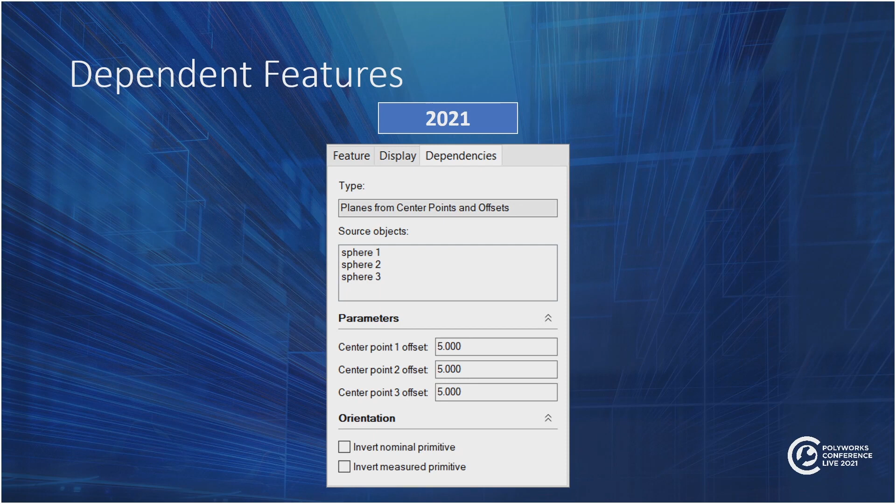Now, in 2020, it is not possible to view or edit numerical parameters for dependent features. Users have to recreate the entire chain of objects or operations when a modification must be made. What they would need to do is create new dependent features. But now in 2021, you can now edit numerical values for dependent features.

The benefits of this improvement include the visibility and traceability of numerical parameters, the flexibility of being able to edit numerical values if incorrectly entered or need modifying, and finally, it is more efficient as there is no need for the user to delete the feature and start over.

Now, the following is the list of parameters that can now be edited within 2021 following this change. So you've got offset, length, distance, radius, height, slope, step, and also tolerance.

So I'm now going to demonstrate to you some of these user experience changes I've just been showing you in the presentation. So I'm just going to come out of my presentation and open up our workspace manager. I'm just going to open up this predetermined inspector project.

So just wait for that to load for a second. Now you will see here, those of you familiar with 3D scanners and possibly our training courses may be familiar with this part. A sheet metal part here that I've created some comparison points on. Done an initial best fit alignment as it was scanned, extracted some features, and then we've performed a DRF on it. So what I'm going to do, just to show you a few of the new changes that you can do in here, the first thing I will show you is the dependent features.

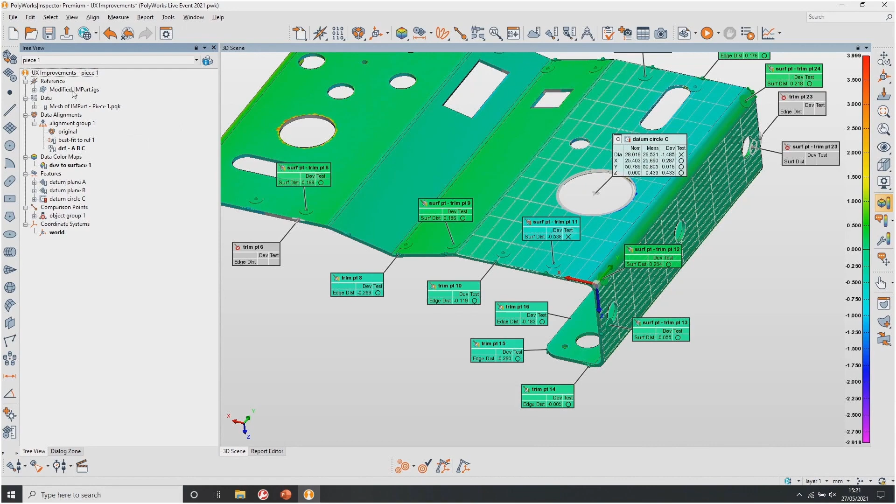So on here, if I just turn all this off, we have the CAD, and we also have datum plane A here. So to show you the changes that have been made to the dependent features, I'm going to create an offset plane to show you how you can edit the numerical values. So first of all, I'm going to go to create plane feature from my features menu. I'm then going to change my method to from objects and then hit the drop down for my sub method.

Now, as I mentioned, you will see this a few times in this demo. We have the search available here. So I can begin to type in planes and offset, and you'll see here it's there. So instead of having to search for it, it's already there. Just jump back to my tree view. So I highlight datum plane A, so it's now highlighted. Go back to my dialog zone, and what I need to do is type in an offset value in here. So I can say, for example, 20 millimeters.

If I now hit create, you will see here that we now have an offset plane, plane 3, which has been offset 20 mil from datum A. Now, as I said, in 2020, you were not able to edit the value of that offset. You would have had to delete the plane and start again. Whereas in 2021, if I right click on plane 3 and go to the properties, if I jump into the dependencies tab, you'll see that our source object is datum A, and we've also now got our offset parameter down here. So I'm now able to go in and edit this to 25, and you will see this move in a second.

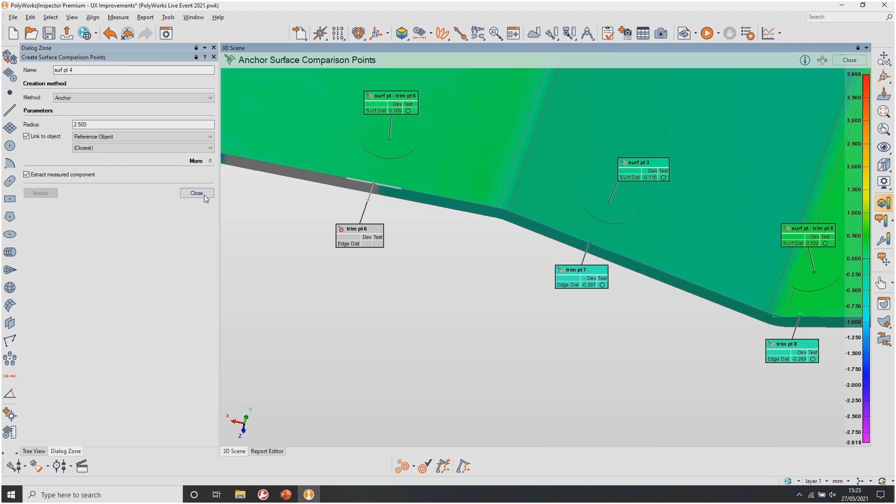Now, you may have noticed when I loaded this up, we do have some comparison points on here. So we have some trim edge points, and we've also got the back points created with those. So you will see here, if I zoom in, trim point 7 here is missing the back point. So just to demonstrate the select interactively tool to you, what I can do is go to create surface comparison point. I can then anchor a comparison point on this face here, close to trim point 7. So that has been extracted for us, which is good. So you see here surface point 3. You can rename that at any point if you want to.

And then what I'm going to do is link trim point 7 to surface point 3. So I can expand my object group, find trim point 7, go into the properties by double clicking if you prefer, jump into measurement, and then offset. You can see here that I can select relative to comparison point. So if I use the select interactively icon, I can then select surface point 3, hit apply afterwards, and that will now be linked to trim point 7. So if there's any deformity in the part, trim point will be affected by the change of surface point 3. So just a few things there to show you in the new user functionalities in 2021 Metrology Suite, so Inspector.

We now move into part 2 of this presentation, where we will look into the changes and improvements for PolyWorks AR. A note to start off this part of the presentation is the support for HoloLens within AR. In PolyWorks AR 2020, the first and second generations of the HoloLens are both supported. For those of you who are unfamiliar with the HoloLens, you will see on screen now the first generation and now the second generation. Moving forward, a decision has been made, as developing PolyWorks AR for both of these generations takes more time. Supporting the first generation prevents InnovMetric from implementing new technologies into the second generation. And finally, Microsoft no longer actually sells the first generation of HoloLens.

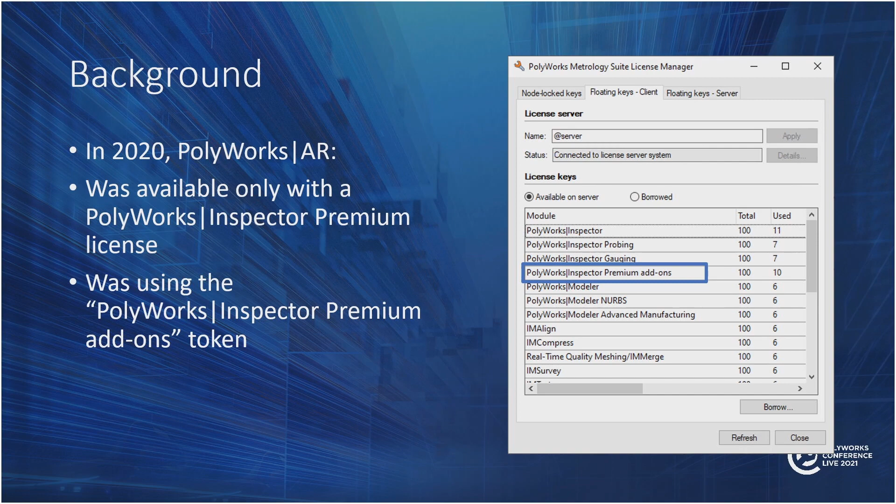A word now on the AR package and the licensing information necessary for this particular product. Now, in 2020, PolyWorks AR was only available with a PolyWorks Inspector Premium license. Within the PolyWorks Metrology Suite License Manager, it was using the PolyWorks Inspector Premium Add-ons token. But now, in 2021, there is a need to make PolyWorks AR available for both probing and gauging workflows. Consequently, PolyWorks AR now has its own token within the License Manager.

To summarise, in 2020, PolyWorks AR was only accessible if the user had an Inspector Premium license, whereas now in 2021, it is possible to use PolyWorks AR with a PolyWorks Inspector Probing and a PolyWorks Inspector Gauging license. This has been enabled to aid new added workflows that I will discuss with you all shortly. In PolyWorks AR 2021, the part localization workflow has also been modified.

In PolyWorks Inspector 2020, the user would have needed to activate the augmented reality plugin from the Workspace Manager options, and then within Inspector would need to access the Tools menu, Augmented Reality, and then launch the Model Target Generator. Once you have selected the Model Target Generator from the Tools menu, if not already, the user would have been required to install Vuforia Engine, which could only be achieved with an internet connection.

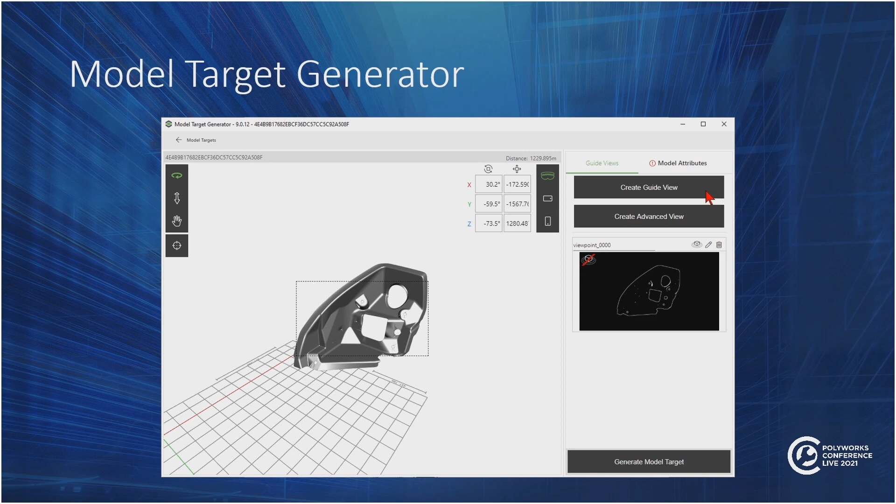Within this software, the user would have had to select the HoloLens icon to establish the in-use hardware, then access the model attributes to determine orientation and units, then create the guide view, and then only once these steps have been followed, generate the model target. The solution in 2021: Vuforia is no longer required to create the model view. This is achieved directly within PolyWorks using the HoloLens.

So now for the part localization process, the user will have to download the open PolyWorks Inspector project using the PolyWorks AR app for the HoloLens. Once downloaded, the user will have to manually locate the hologram onto the physical part and then decide whether to use their own manual positioning or choose the auto locate feature. I'm now going to show you a quick video of how this will all work.

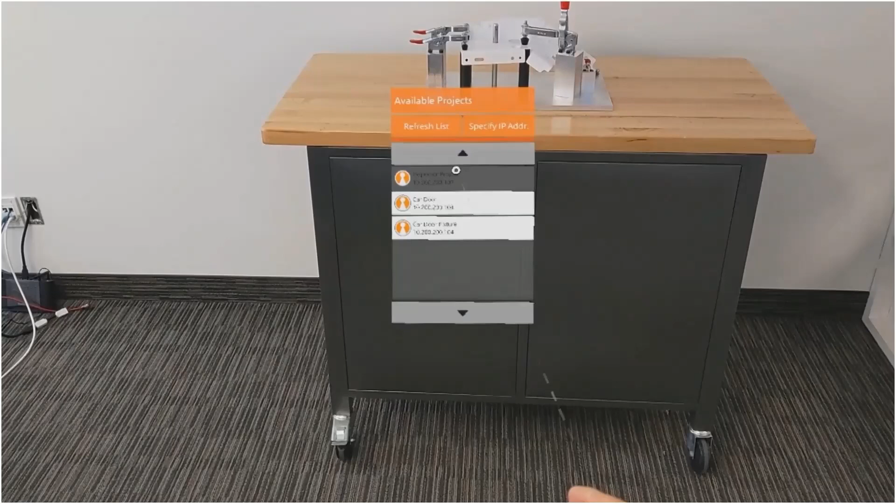So with their wrist, the user will have to tap onto it, which will open up the HoloLens, and the user will then have to select the PolyWorks AR app. You will need to have the Inspector project open at the time. So you can see here now the user is going to select the Inspector project from the app. And this will just take a few seconds to download. As you can see here, a download has been successful, so you will have to select the OK button.

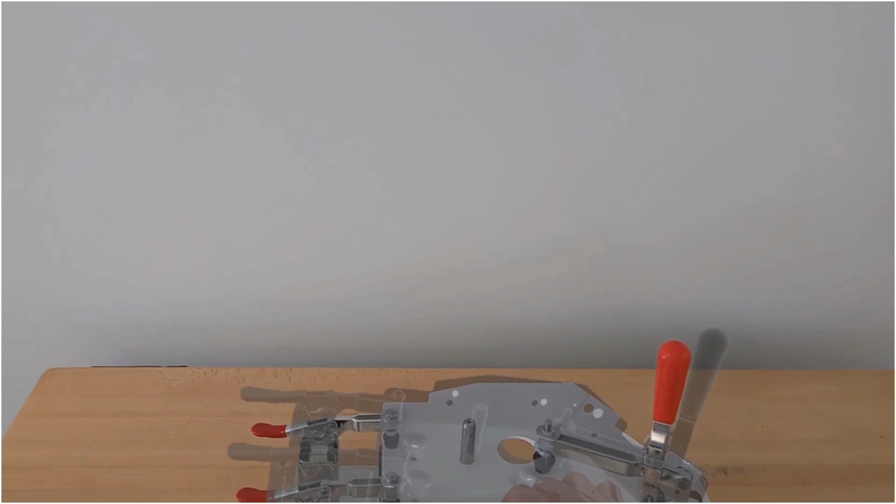So that was just showing you how to begin the part localization. So you can now see the hologram you can control with your hand by pinching. So this will allow you to rotate. So the idea of this is to manually position the hologram onto the part. So you can see here the user is doing different techniques to move the part around. So again, with the pinch of the fingers, he or she is able to rotate. You can also use rays on the model. So you can sort of step away and use the rays to also orientate it, as you can see here.

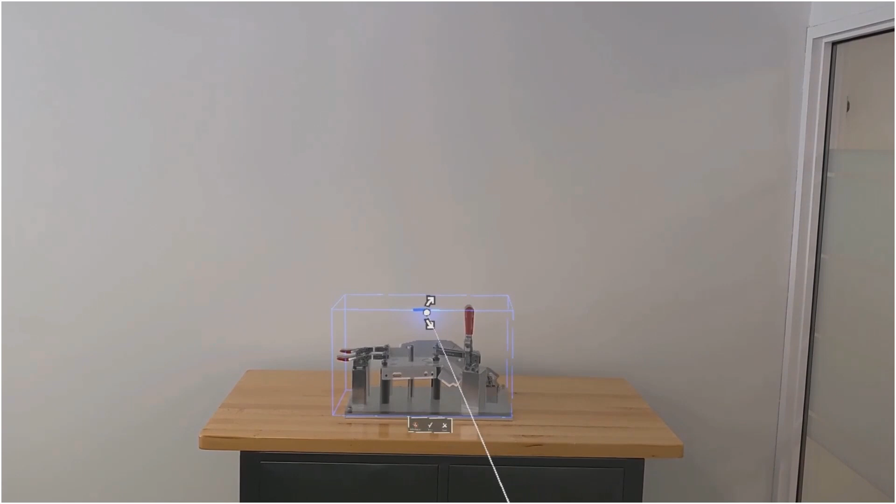Another technique for the manual orientation of the hologram are these handles that will appear on the bounding box of the hologram. So this will allow you to orientate it sort of through an axis. You do want to get this as close as possible, but it doesn't have to be perfect.

And then the last thing that you will do is, as on the previous slide, you will have a toolbar at the bottom where you can either use the auto locate, which will do it for you, or you can accept the manual location that you have created yourself. And then as you can see here, the part has been localized. So there are different techniques that you can choose. And then yeah, once you are done, you will just hit either auto locate or go.

There is no longer any installation required on the user's PC. In regards to the HoloLens, you will need the PolyWorks AR for HoloLens app, and potentially a framework package might be required for you to install the first time you use the PolyWorks AR for HoloLens app.

The interface has now changed too. You'll now see that even when the augmented reality plugin is turned on in the Workspace Manager options, the option has been removed from the Tools menu in Inspector, as the need for Vuforia engine has gone.

The date at which the support for Vuforia will end is May 2021, so we have in fact actually already gone past this date. PolyWorks part localization is supported from PolyWorks Inspector 2020 IR11 onwards.

The benefits are that there is no need to install any additional software. There is also no need for an internet connection, previously required to install Vuforia. There is a much smoother transition between PolyWorks Inspector and PolyWorks AR, as there is no need for any project preparation in regards to Inspector.

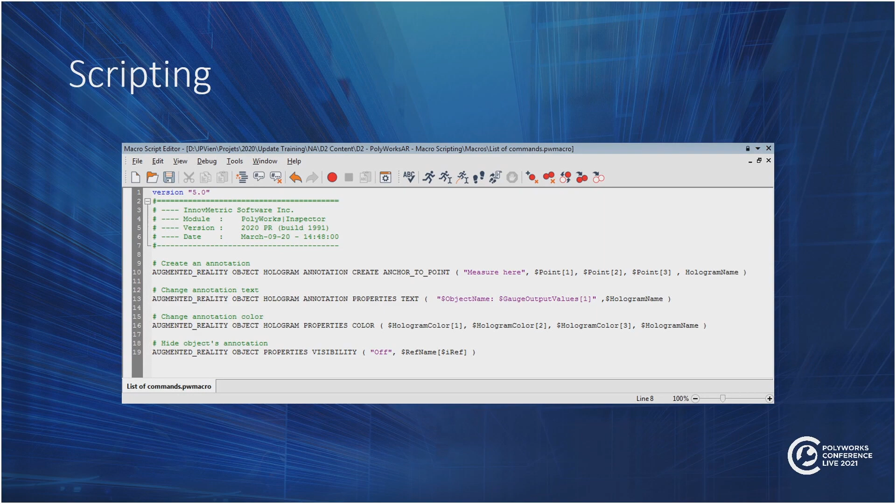To unlock as much workflow as possible, macro commands were developed, including creating an annotation, changing the annotation's text, changing the annotation's color, and also hiding an object's annotation.

Now, due to a high quantity of user requests for specific new functionalities, there are two brand new supported workflows for PolyWorks AR 2021. We now have a gauging workflow, and we now also have a build inspect workflow. I will be showing you both of those shortly. So let's start with the gauging workflow.

Previously, to be able to measure using a gauge device in PolyWorks, PolyWorks would obtain the measurement using a macro script. This is no longer the case because of the new gauging plugin. The solution is that PolyWorks AR 2021 now guides the user to the correct location.

The HoloLens will then automatically take a picture once a measurement is acquired. The user can then access the captured image in the object menu, where they can then either view the image, export it, or delete it. So this is a pre-recorded video from InnovMetric, just demonstrating this process. So it begins augmented measurement with digital gauges.

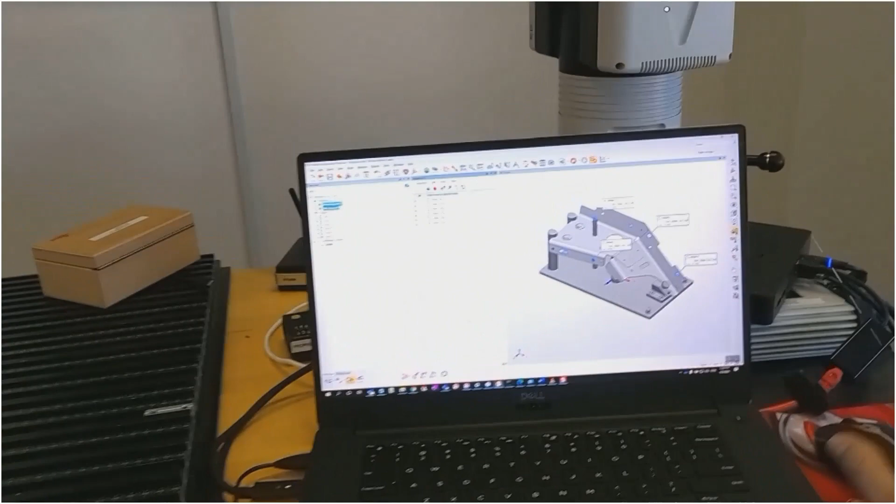Okay, the goal is to measure this part with digital gauges. So I have a project already open. I have some objects set to the gauge method, and I created a measurement sequence. So if I run that sequence, you see that I have some guiding instructions telling me to measure the width of slot 1 using gauges. And you can see that if I would be far away, I would have guiding arrows that would point me in the right direction.

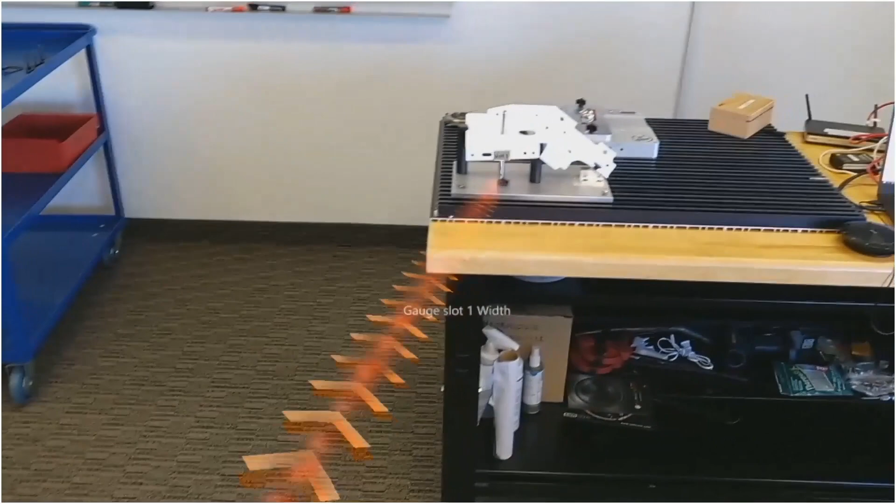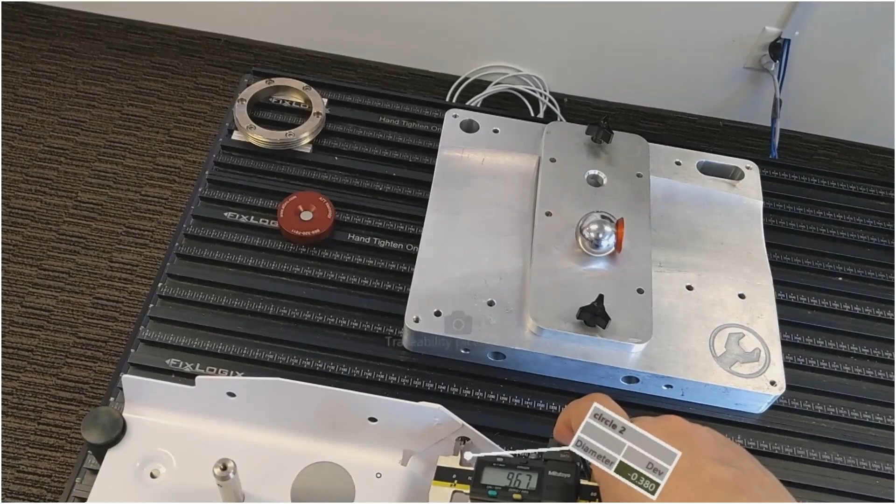I can now go and measure this characteristic, and I want to stay there for a few seconds because it's going to actually take a picture of where the operator was during that measurement. He then follows the instructions to the next object. You always see the previous result and the next object to measure.

I'm done. I can see all my results. I can just move annotations out if I need to. And that's it. I was able to do a guided inspection, but with the added benefit of traceability. For any of those objects, if I wanted to review,

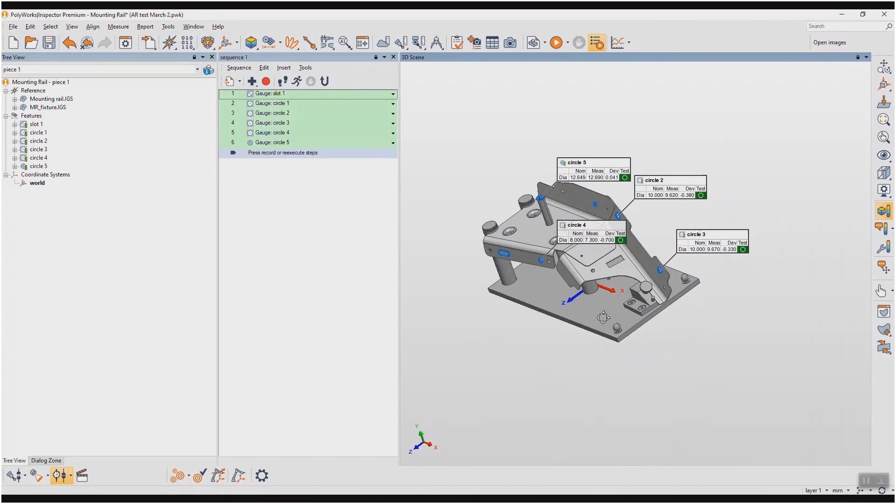for example, that circle, if I want to make sure where that measurement was taken, I can go into View, Capture Gauging Images, and look at the picture for the diameter. And while I was measuring, it actually took a picture, so I can validate if the measurement was done properly at the right place.

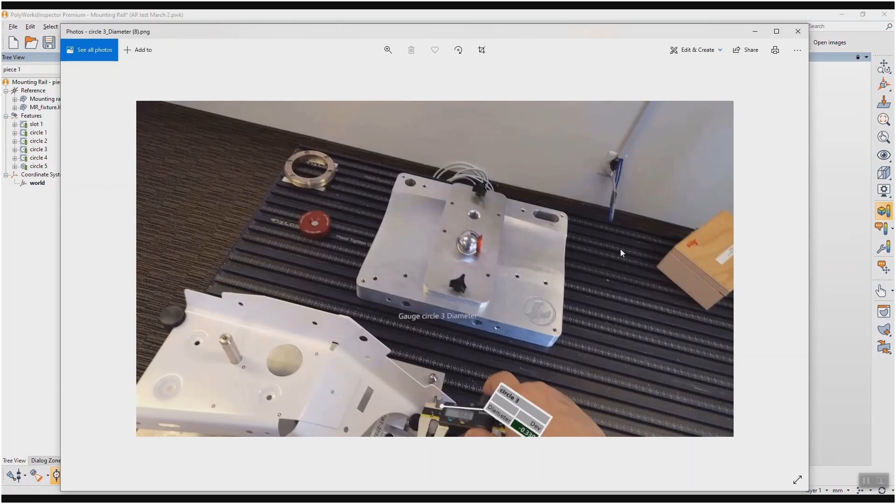Here I built a little macro that just opens all of them. So as an example, I could say, okay, this one's good. They were all measured at the right place with the right device. So this is AR for digital gauges.

The benefits of this new workflow include the traceability of the acquired measurements, the unmatched guidance, and also the ease at which this can be used to help train a new employee.

We now move into our second brand new workflow for PolyWorks AR 2021, the Build Inspect workflow. The guidance for Build Inspect is traditionally seen on the computer screen in the top right corner next to the DRO. The solution is that it is now being added to the PolyWorks AR app, as you can see here.

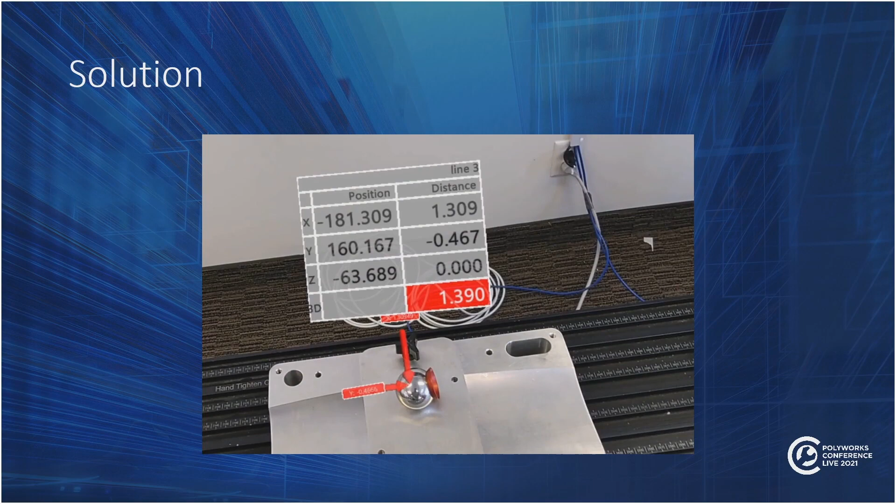Okay, the goal is to use Build and Inspect with AR. So as you can see, I'm already aligned to the real part. And here in Inspector, I'm going to start the Build and Inspect mode on those two holes. I'm using the vectors from the cylinders, and I'm going to build and inspect them.

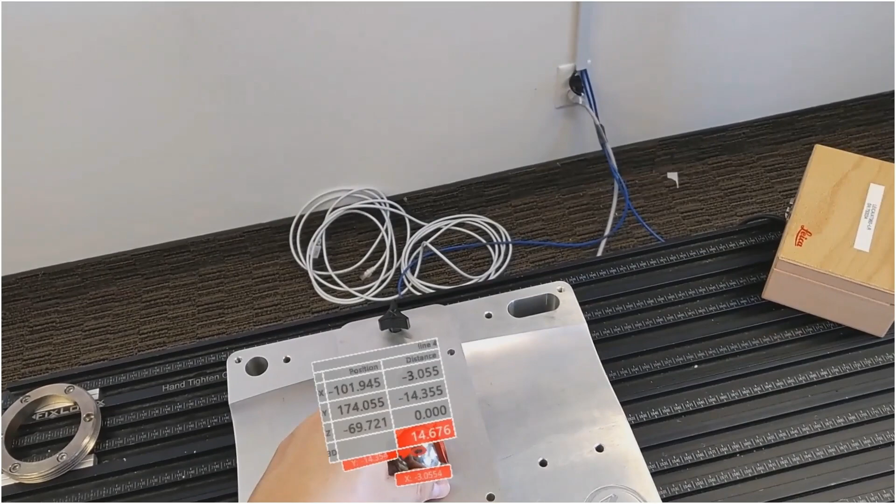So what you see usually on the screen, you actually see directly on the part. So you can take the reflector, put it on the object, it will automatically match the right object. Note that you can take the DRO, you can make it larger if you want and put it where you want. And the idea is to locate the holes properly.

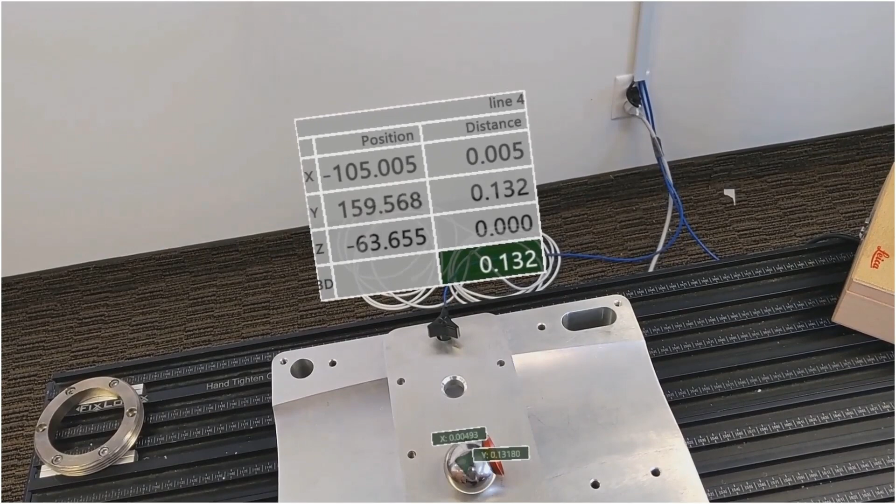So as an example here, I'm going to use the arrows to know in which direction to move the part. To go within tolerance, I'm going to lock this one, move to this, and I'll make the needed adjustments. I'm within 0.1, it's not too bad, oh, it's actually really good. Go back and check this again, 0.5, I could improve that a little bit.

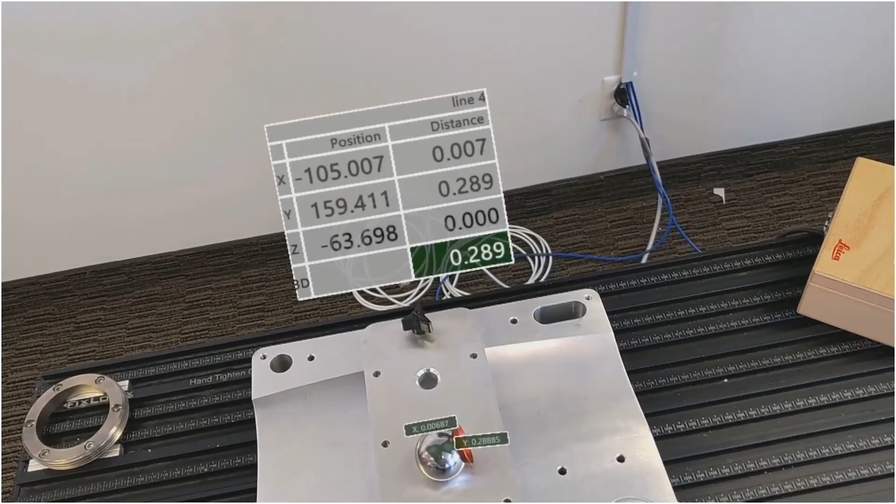And as you can see, I was able to go to 0.45 millimeters here, 0.2 millimeters here. Refine this even a little bit more. So you can achieve really good tolerance, all of that without actually looking in the computer.

There are some limitations, however. PolyWorks AR will automatically adjust to PolyWorks Inspector. There is no way to start the process from PolyWorks AR. Also, there is no configuration within PolyWorks AR. But on the flip side, there are some benefits to this new functionality. The ease of use, and also this is a perfect tool for when working away from the computer, for example when using a laser tracker. Now, that brings us to the end of this part of the presentation.

Moving into the penultimate section of the changes and improvements presentation, the topic I'm going to share with you all now is in regards to PolyWorks Modeler, more specifically improving the NURBS surfacing workflow. A new toolbar has been introduced to better aid the user in the NURBS surfacing workflow. Surfacing tools are already available within Modeler, and the new surface toolbar is hidden by default. I will be demoing this shortly and showing you how to turn this on. The toolbar contains the most useful tools to aid the basic surfacing process.

I'm now going to take you through an improvement to an existing function within PolyWorks Modeler. This tool has been around for a while but has been significantly improved in 2021. The tool I'm referring to is the automatic NURBS surfacing function. The tool is being referred to as the next generation surfacing solution for smart reverse engineering.

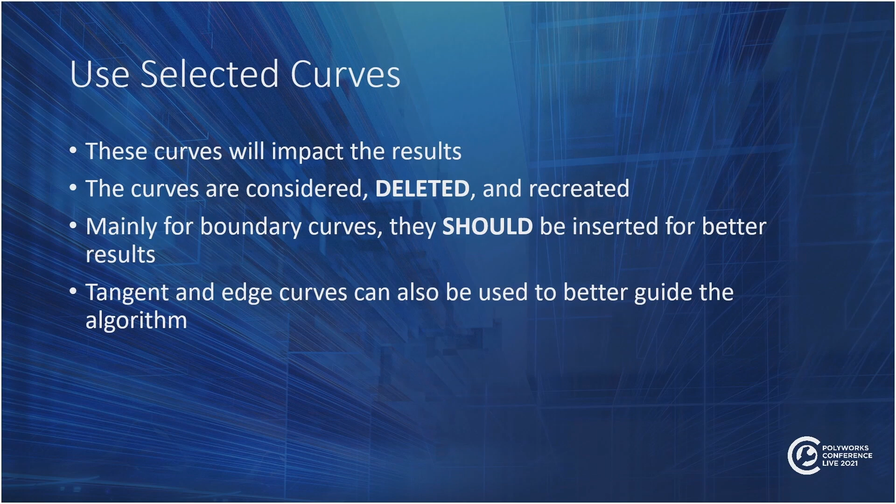They are mandatory for open models. Closed models, on the other hand, have surfaces all over, so do not require them. As mentioned before, tangent edge curves can also be used to better guide the algorithm.

Now, for the minimum angular feature detection span. Angular span is when we have a change in shape on the model. If the value entered is larger than the minimum angular span on the model, then no curves are created. If smaller, curves will be detected.

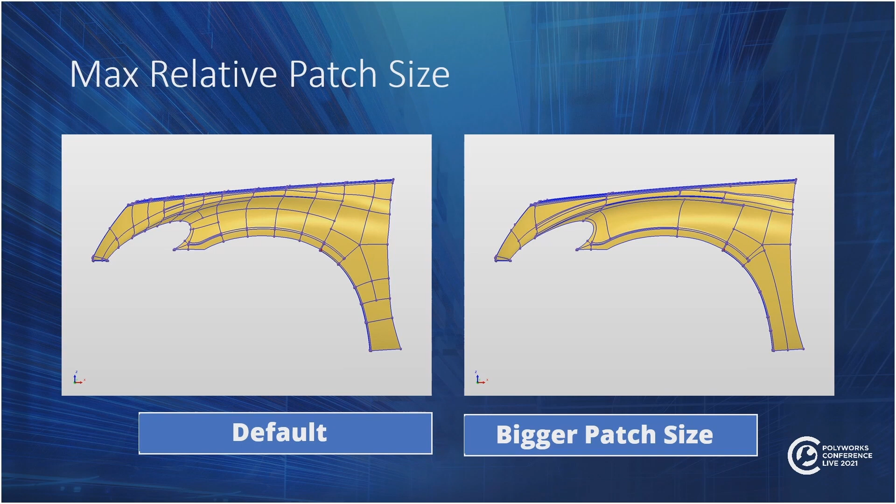As for the relative patch size, that is determined by the bounding box of the part in question. A larger value will produce larger patches on your models.

So I'm now going to demonstrate the new Auto Nurbs tool in PolyWorks Modeler. Here in Modeler, I have the imported sheet metal part as a polygonal model. The first thing I'm going to do is turn on the surface modeling toolbar that I've been talking to you about, so I can right click in the empty space up here and go down to the surface modeling tool.

Now, users of Modeler will be familiar with some of these icons as they are already integrated into the software. It's just this new toolbar is to allow for the basic reverse engineering process. So we have here our polygonal model editing tools: interactive hole filling, smoothing, and reconstructing.

We then have our curve tool, our fit curves, insert curves, and then we have create Auto Nurbs and our curve editing tools here as well, and then fitting our Nurbs patches.

So the first thing I'm going to do is to check the part for any defects, and all seems to be okay. So at this point, I don't really need to use the hole filling tool or any of the others here. So the first thing I'm going to do is create a boundary curve on the model, and I'm not going to make any changes in here, so just hit create.

And if I close that down, you'll see that creates our 4 boundary curves. Next thing I'm going to do is insert these curves into the model. So I'll do this bit first, insert. Once I've done that, I can then highlight my 4 boundary curves, as you can see here. I'm then going to hit on create Nurbs patches from polygonal model.

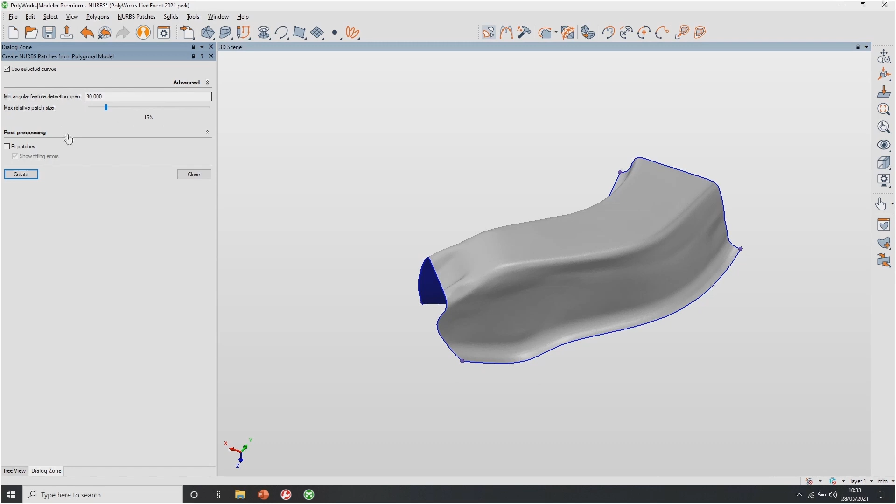So you can see here the curves have been created. Relative to 2020, the grid structure that you can see here has improved. In 2020, for example, curves would not always go up to the edge of the part. It's not perfect, as you can see, as there are still some T-junctions that can be improved afterwards using the curve editing tools.

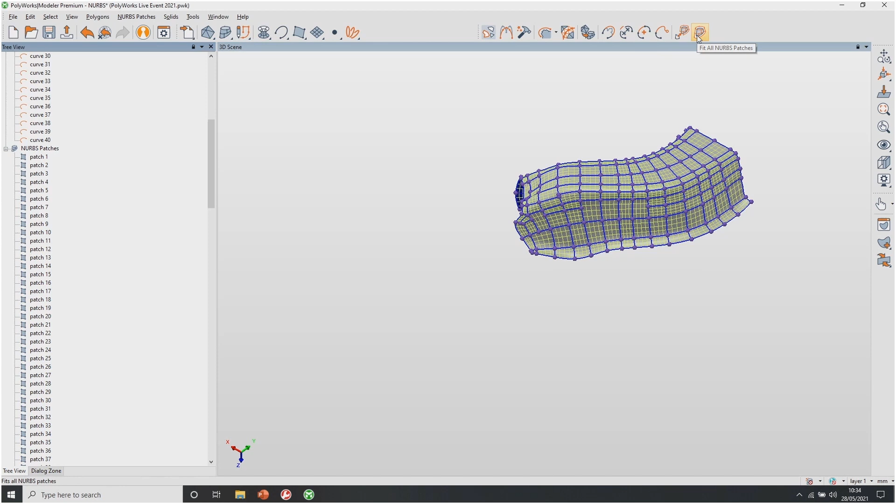And now we have our Nurbs patches here, so I'm going to fit all of those. So I can either manually select them and use the unfitted Nurbs patches, or I can just do all of them at once. So, fit all Nurbs patches. Hopefully this won't take too much longer.

Almost there. There you go. So we can see that it's now been fitted.

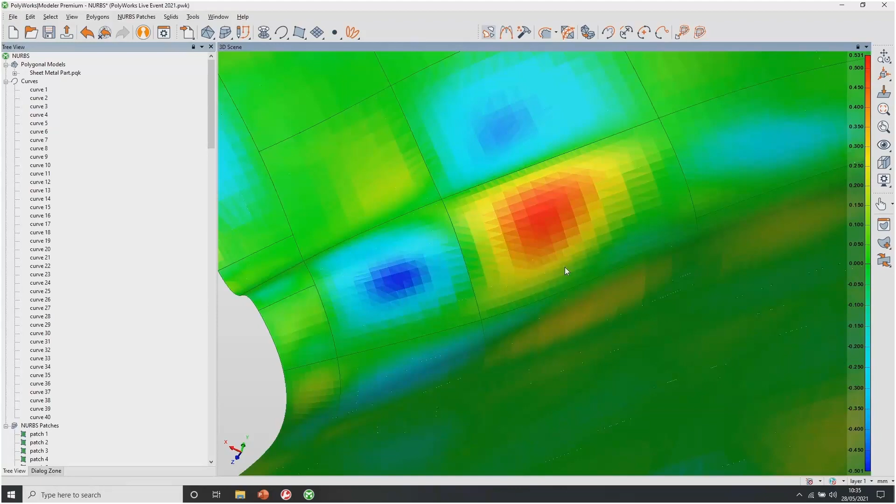To show you the fit, I'm going to turn off our curves, and in my object display options, change my color mode for the Nurbs patches to fitting errors, then turn off my polygonal model. So you can see here we do have some slight distortions in the models. As I said, it's not the perfect tool, so you may want to go in after and edit some of these curves using our edit curve tool.

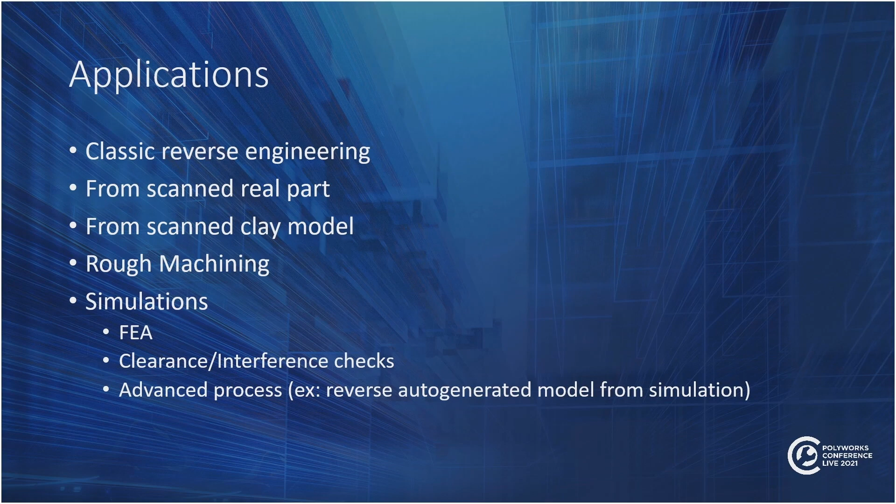This topic looks at a change to the Airfoil gauge tool, specifically looking at the new tolerance blending option.

I will be demonstrating how to create these tolerances, how these tolerances blend shortly, but first a bit of background on the subject for those less knowledgeable.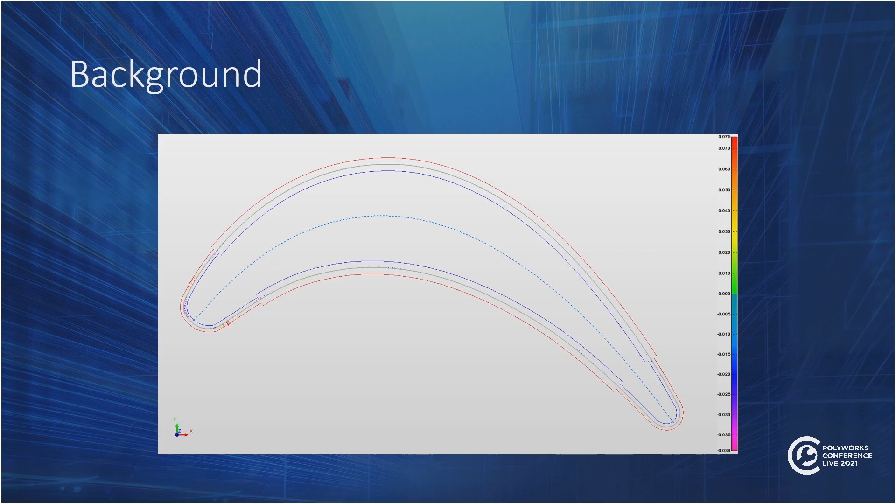Some of our customers have requested that this step is no longer a step and more of a transition, due to information specific to drawings. Now I can't show you any of these drawings due to confidentiality reasons, but I have pulled some quotes from said drawings. The first was to blend smoothly with remainder of aerofoil section profile, and the second, tolerance band in these regions should be a smooth transition between adjacent tolerance bands.

It is possible to control the tolerance blending with regards to the neighbouring segment. You can either leave it as you've just seen previously, or you now have the option to blend, either linear or smooth. It is also possible to control the blending length.

We now have an example with no tolerance blending. Now with trailing edge linear blending, and now with smooth, and back to none again to show you the transition. We now have linear, on a few different options on the pressure and suction segments too. And again, back to none, just so you can see the differences here.

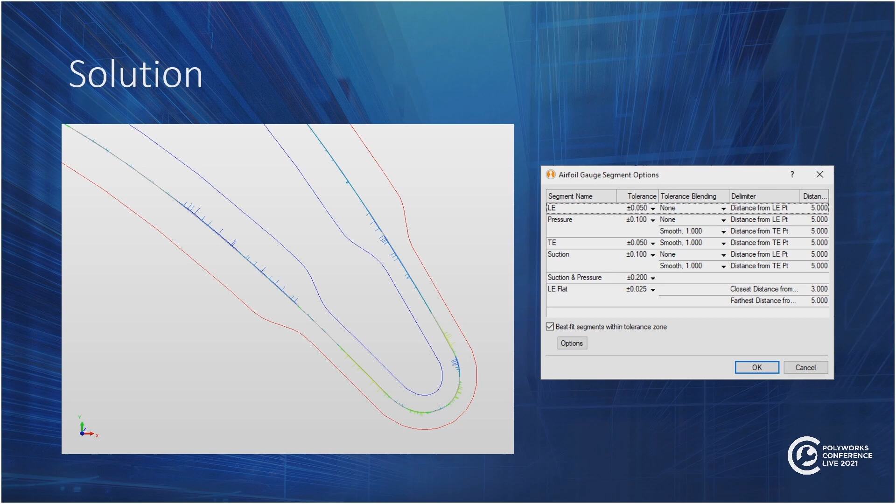Now, instead of linear, we've smoothed the transition from the trailing edge. Smooth again, only this time again with pressure and suction. And just to show you, this has been available since PolyWorks 2020 IR10.

The default values for these blending tolerances can be found within the PolyWorks Inspector options in Objects, Gauges. So just here in the options. There is also the option to best fit each individual segment to the reference object within the tolerance zone, found here.

This will have no effect on the airfoil measurements. As you can see, the best fit cross-section within the airfoil's properties is unaffected. Benefits of this improvement: it is now possible for users to inspect airfoils as requested on their drawings. It also allows users to best fit segments and compare them to reference objects, considering a transition zone between the different zones on the airfoil.

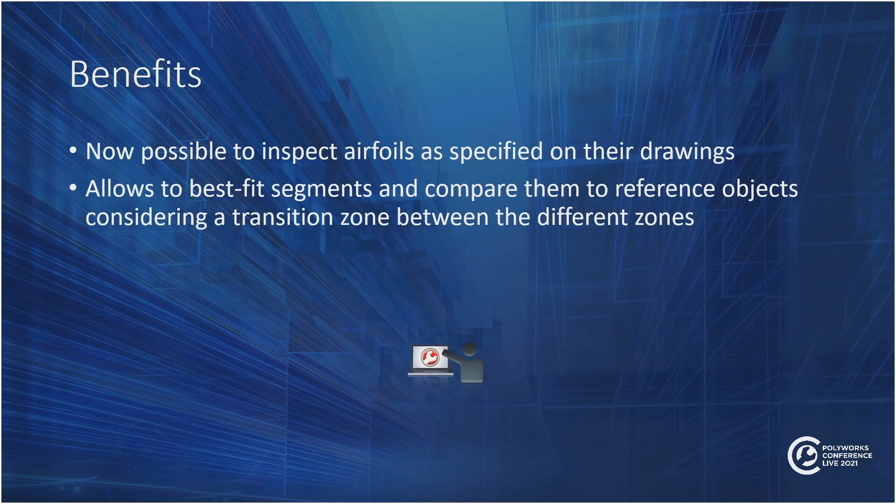To finish, I will quickly demonstrate the key steps required to be able to create these tolerance blends. I'm now going to show you the airfoil tool and the changes to the tolerance blends.

So we have here an inspector, we already have a blade, and it's been aligned using a best fit. I'm going to go to our gauges tool and create an airfoil gauge. I'm going to use the along standard axis, change it to Z, and then just anchor a point here on the airfoil and hit confirm. So that is our airfoil gauge.

The first thing I'm going to do is show you where you can change the blend tolerances. If I double click to access my airfoil properties, and then hit the tabs here, you can see we have our analyze segments. So I will need to turn this on and jump into the options.

Now you can see our tolerance blending here, but I will show you how it works before we input those. If I hit OK, you'll see on the annotation we do get some different changes here, if you've seen that. So I'm going to close down the properties window, and right click on the created cross section that accompanies the airfoil, and just view that on its own.

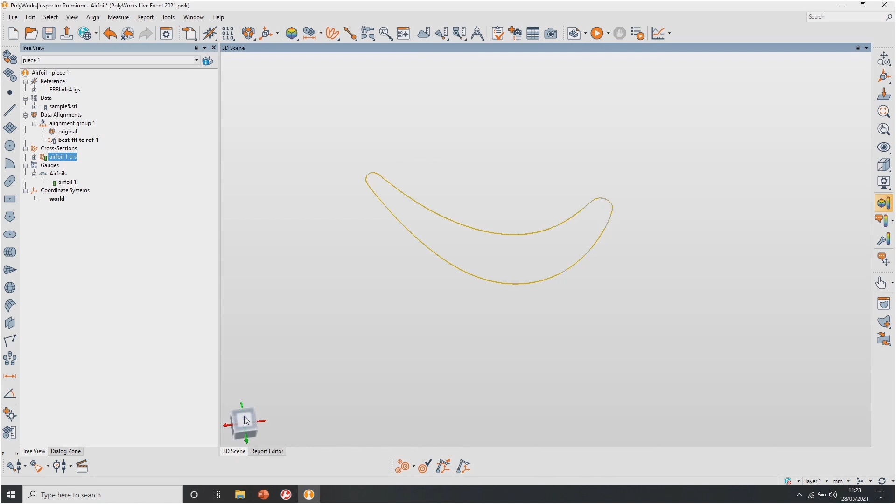So you'll see here we have the cross section for the airfoil. The first thing I need to do so you can see the changes I'm about to make is go into my object display options, and first tick off the hide colour map. So you'll now see we have the colour map on the cross section, and also show you the tolerance curves. Now you'll notice that there is no step on this cross section.

The step only applies once I've created some airfoil gauge cross sections. To do that, I will first click on our airfoil 1 and then go to cross sections, create standard cross section, and my method here is going to be from airfoil gauge segments, and I will leave them all turned on to show you. So if I hit create and then close that down, you can already see we have the step here.

So I will hide the initial cross section and the final two so you can see. So we have here at the leading edge end, you can see the step there.

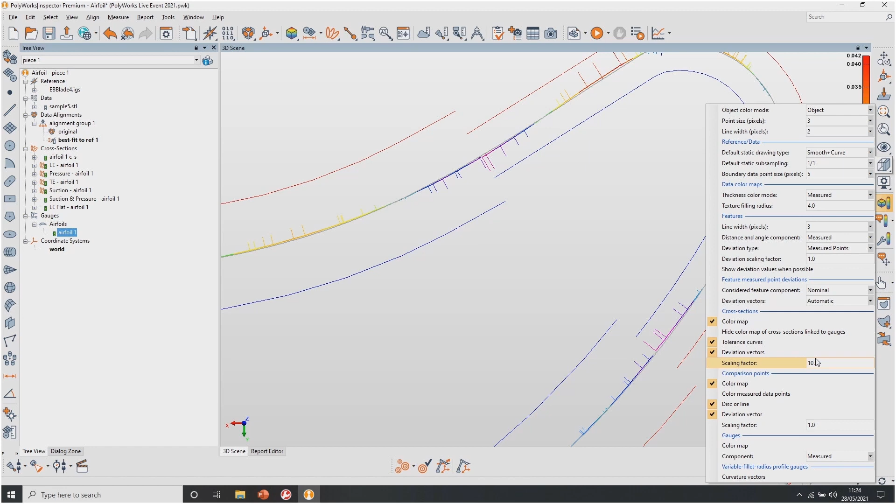The distance in step here, that's not caused by the tolerance, that is caused in your object display options by the scaling factor here. So if I was to change that to 10, you will see that that does increase that. So that is just a graphical display option there that you can edit.

So to be able to put the smoothing on, whether it's linear or smooth, what I can do is go back into my airfoil properties, back into Analyze Segments, and then I can change my tolerance blending here. So for example, we will use the trailing edge. So in my trailing edge row here, I will change the tolerance blending to blend with neighboring segment, and then I will leave this on smooth to show you. And then, as I said before, you can specify the blending length also.

If you want to do this to all of them at once, you have the apply to all segment extremities tick box here as well. So just for the time being, I'm going to leave that off just to show you. And then again, we have best fit segments within the tolerance zone. So that will best fit each segment to the reference object. So if I hit OK, that will update the trailing edge for us. And you will now see on the trailing edge, we have our smooth blending option here turned on.

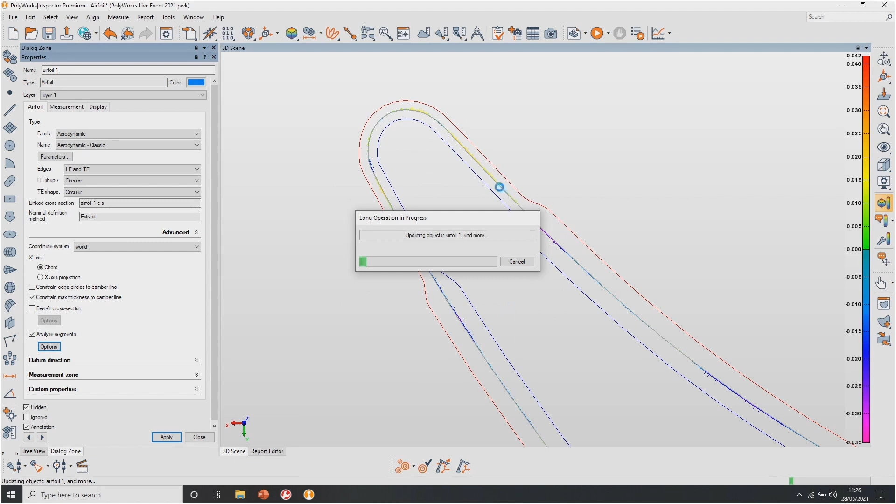And then just to show you again, I will jump back into there and change that to linear, hit OK, and that will now update for us. So you will see it's slightly changed. So instead of smooth, it is now linear. And what I will then do is apply that to all of our segments, so you can see how that works across the whole of the airfoil. So if I come back to the leading edge, you will now see the same here.

So just to summarize, you will need to, first of all, create the airfoil gauge. You will then need to turn on the object display options, so it will show exactly what you're after. So you will need to make sure that the tolerance curves are showed. You will then need to jump into the airfoil gauge options and change the tolerance blending, which wasn't available in 2020. And then, as I've just showed you, you will need to make sure that you create these cross sections here. So once again, in cross sections, and then from airfoil gauge segments, and that will give you the tolerances that you are after.

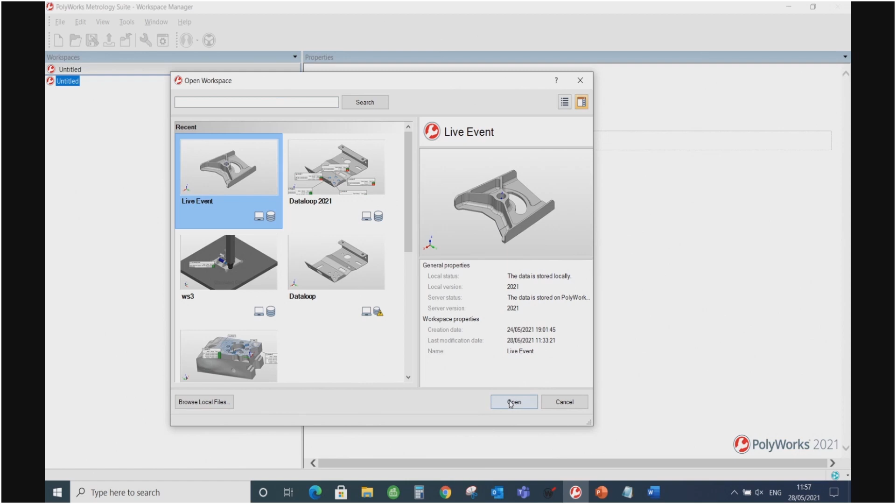So I'm just going to open up my PolyWorks, and I'm going to choose my workspace and just download it from the Dataloop. Okay. I'm going to choose the project, and we'll open that up. So the part is an aileron hinge. Okay, so it has a datum on the back face, it has a datum through the central cylinder, and the area that we want to check is where the hinge would, I suppose, rotate about.

Okay, so this cutout here is quite important because that controls how much the aileron can rotate. So we might want to check the line profile to make sure the cutout is as it's supposed to be. So to create a line profile, what we now do in PolyWorks is we create it as a feature, but we choose it as a polyline feature. Okay. We can create it as a single segment or as multiple segments. And we can do the full curve or we can do a partial curve.

So a lot of the time it'll just be a partial curve that'll be called out for on the drawing, and it's a simple matter of, like what we have with our cross sections, just choose the partial curve option. In this case though, I'm interested in evaluating the full curve. Okay, so simply select it on the CAD model and it'll pull it out. Okay, and we can see here in our tree view we have a polyline. I'm just going to move these annotations out of the way.

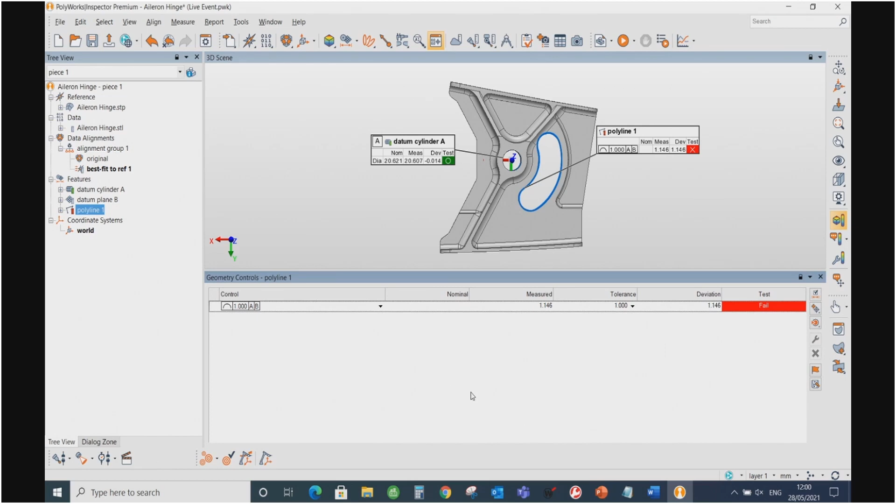Okay, so that's now pulled all the information out from the scan data. What I'm going to do in the geometry controls is I'm just going to add a line profile GD&T, and I'm going to tell it it's coming from A and coming from B as specified in the drawing. Okay, and we can see a result getting pulled out. I'm going to turn off the length value, I don't want to see it at all. So I'm just going to show our scan and hide our CAD.

Okay, and I'm just going to evaluate what area of the scan the information has been pulled from. So I'm going to select first of all the measured data points that it's using to measure the local plane. Here is where we can see how our max angle works. Okay, so anywhere that's highlighted in red, we can see it's pulled out those points and it's using them to create the local plane. As the curvature changes on the top face here, and this becomes a fillet, we can see that PolyWorks automatically knows not to take those points.

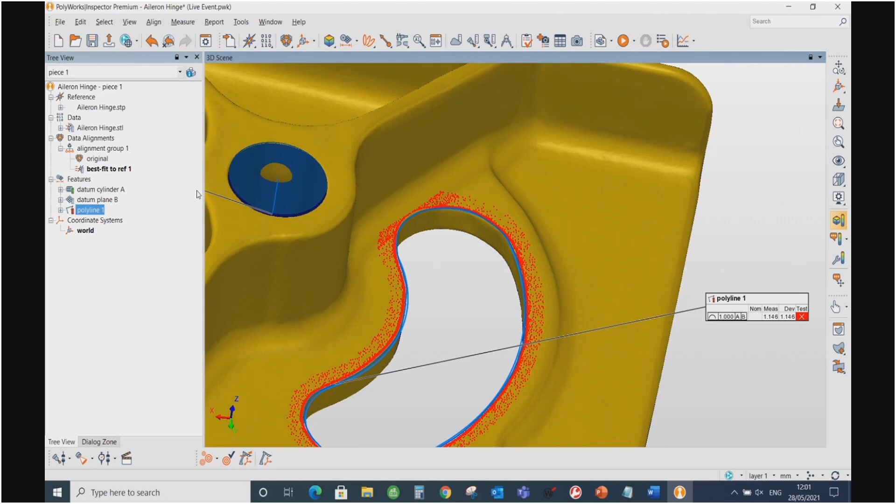And that's because those points' normals don't fall within the 30-degree range that we set to the CAD model. So the polyline knows it's supposed to be in that area on the CAD model. And if the points' normals change beyond 30 degrees, then it just stops taking them. Okay, so it becomes quite an intelligent tool then.

We can as well select the data points inside our cutout, and we can see all the points then that it's using as well for measuring the polyline inside. Okay, we have those functions already built in, but we hadn't done them before for a polyline. We had them for circles and other 2D features.

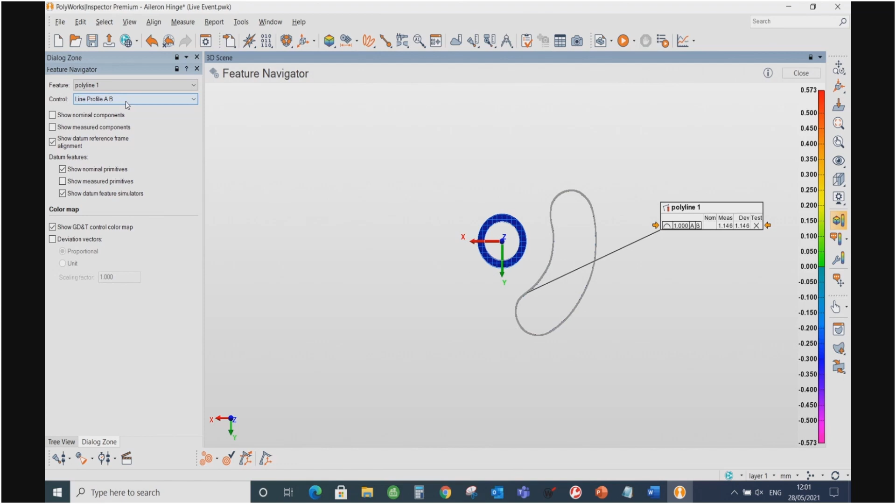So we have our polyline picked out, but we might want to delve a little bit deeper into it and maybe view our feature navigator. Okay, so that will highlight the component that we're interested in, so our polyline, and then we can highlight the control that we're interested in. So we're interested in the line profile. If we turn on show deviation vectors, what that will do is it will give us deviation vectors all around our polyline, and if we just want to make them a little bit bigger, we can up our scaling factor as well.

So we can see that we are low material in some areas, and we've gone a little bit high in other areas. Okay, so in the likes of here, I would suggest maybe this might be a problem. So if this part is swiveling about a dowel, then the dowel is going to stop short on this area.

Okay, so to report this, we can just create a screenshot. Okay, add a title for our report, and continue on and measure the rest of our part. But we can see now in our report that we have exactly what we had wanted to see. Okay, so let's jump back then to review some of our other features that we've been working on.

So the next major function that's been added is splitting measurement steps. Splitting measurement steps in PolyWorks allows us to create measurement sequences which have measurement steps for the same feature split into different areas of the sequence. As you can see from the image of the sequence, the same feature has been split up into different steps of the sequence. We are going to look at how we do this today on a CMM.

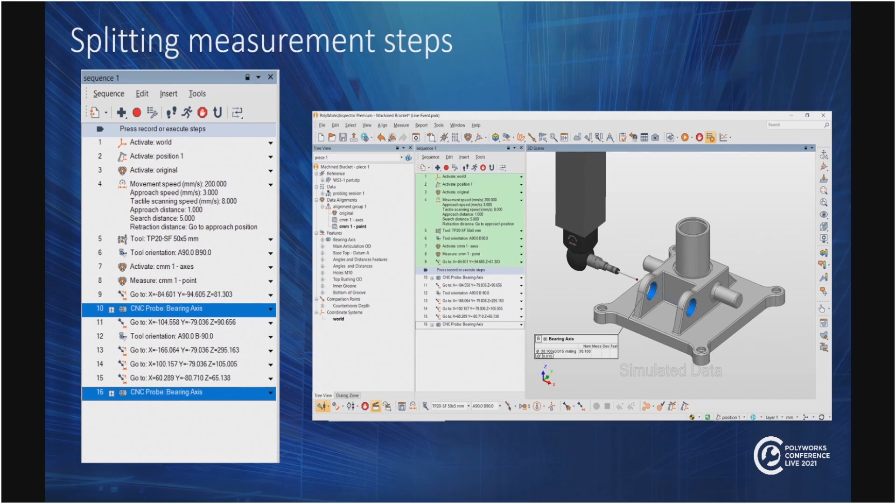But bear in mind, the same principle can be used with laser tracker, measuring arm, or hand tools. Let's take a look at how this works. Okay, so I've opened up my workspace manager again, and I'm just going to go into my machined bracket.

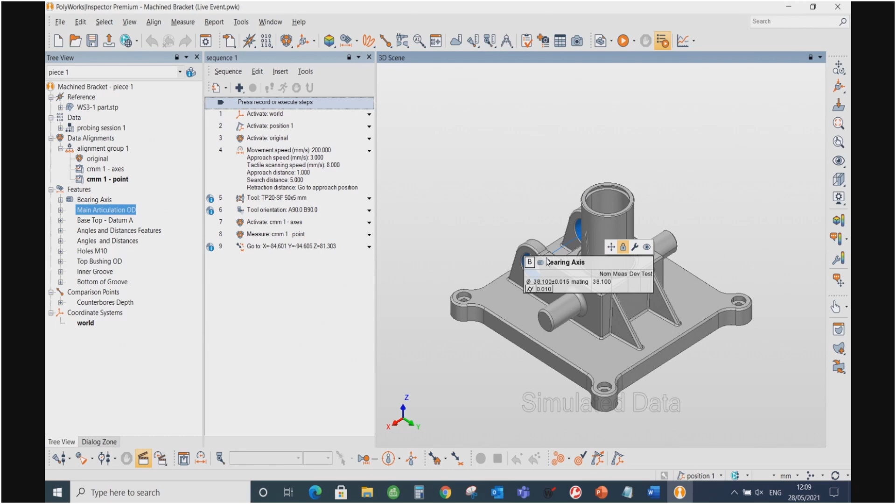So the part that we're opening up here has a few features that need to be measured as one, but they're on two different surfaces. And to create the sequence efficiently, it's better to actually split up some features. We'll have a look at these as we go through it. I'm going to show two different methods as well. The first one is having the software split the features by itself, using its sequence creation technology. And the second one, I'm going to show how we would do it manually.

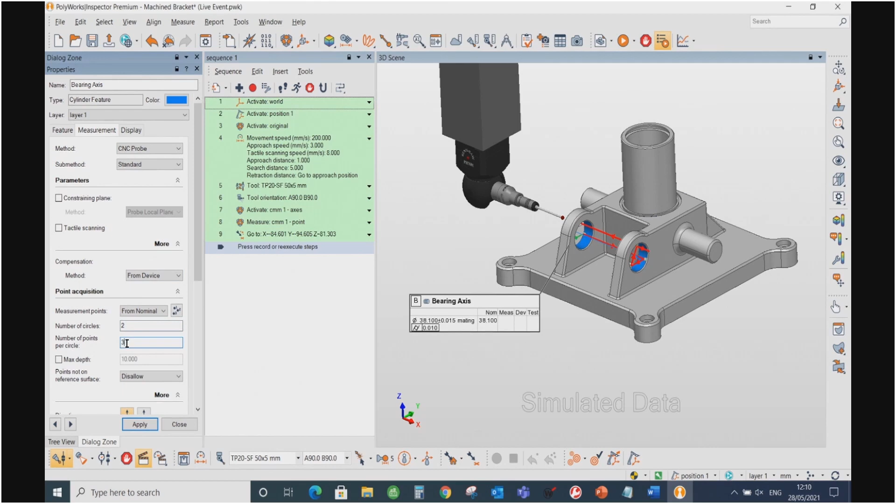So I'm going to start off with this bearing axis. Now I've already got some steps in, so I'm just going to execute these. I'm just going to run the sequence up to, and basically all it does is it puts our CMM in a nice starting position for me. So let's have a look at the properties of our bearing axis, and let's modify them. We have 2 circles to measure, and I'm just going to up my number of points to 4. So it's going to take 4 points in each of these faces.

Now, what I am going to do as well is turn on the endpoint exclusion. I want to come in about 8 mil from the edge, so I'm taking points more central in each cylinder. Going to turn off my movement before and my movement after, as we are going to be splitting these up. And I'm just going to hit apply.

From there, I'm now going to jump into my edit sequence and measurement path interactively. This mode, if you haven't seen it before, gives us these tools on the bottom. What I am going to make sure is that PolyWorks is given the ability to automatically select tools and tool orientations. So that means that it can change its tool orientation by itself, and we're not locking it into a position. We will be doing that later on, so I'll show you again how that works.

Let's now add our bearing axis by highlighting it, and we're going to add the selected object to the end of the sequence. PolyWorks will now put that feature into the end of the sequence, but it'll also split it into 2 halves, or 2 measurement steps, and it'll add go-to positions and a head orientation change in the sequence as well.

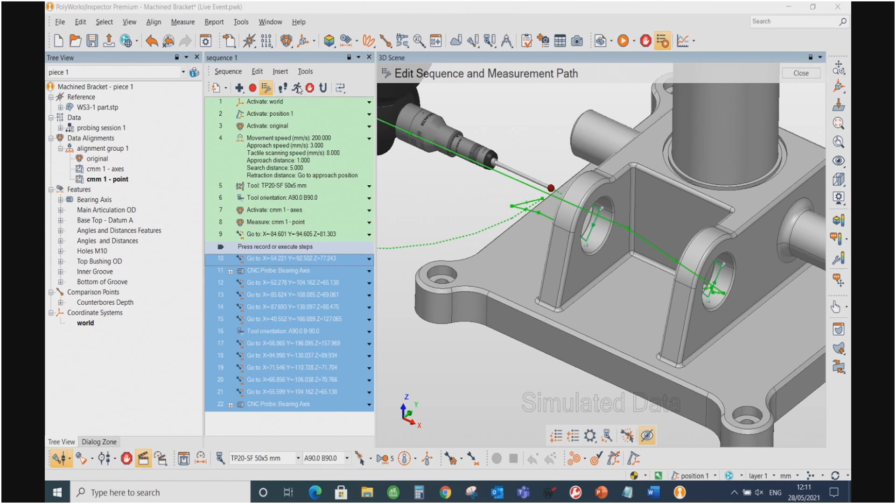So if we just have a look at what it's done. It measures the first half, it knows to back off, it knows to change its head orientation to get around to the other side, and it's now measured the other side. Now, what I'm going to do is continue on. I'm going to measure some other features, and we're going to go through that same sort of process, but we're going to do it manually.

So what I want to do is start out at a good position. I am going to just drive my CMM out of this hole, and I'm going to add in a go-to position. An easy way to do this, in simulation mode, is to use the up, down, left, right arrow keys. So if I press down on my arrow key, I can move the CMM down, and if I press the right button, I can move it to the right.

Another tip is if I want to add a go-to position into this location, I can simply hit record on my sequence editor and hit insert on my keyboard, and that's now added this go-to position at the end of my sequence. So, finished with my bearing axis, and I'm going to move on to this next cylinder. Again, going to set up some parameters for the measurement of it.

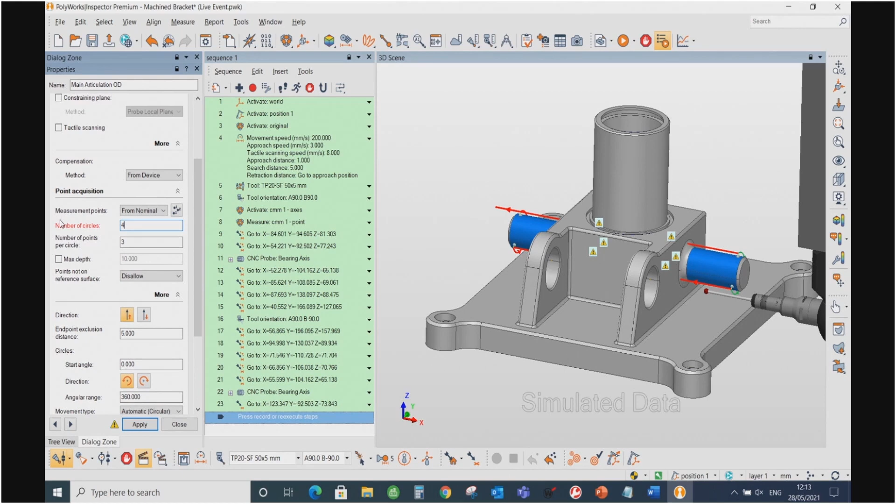So we're going to tell it it's CNC probe, submethod standard, number of circles, I'm going to change that to 4. And we can see there's some warning flags up here, and we can change the number of points per circle. Again, we'll keep it consistent, and we'll keep it on 4 as well. Now, I obviously have points in here in the center of the part that it can't measure. So what I'm going to do is apply the current changes.

I'm just going to put this back onto 4. Okay, and I'm going to get rid of the movement before and movement after, because again, we are going to be splitting this feature up. And the measurement points, I'm going to modify.

So if we go to our measurement points, we have highlighted now on the left hand side of our list of measurement points any ones that there's going to be a problem with. Okay. We also have now numbered the points, so it's very, very easy to recognize which point is going to be first, second, third, or if you're worried about any sort of area, you can easily see and modify them by this list.

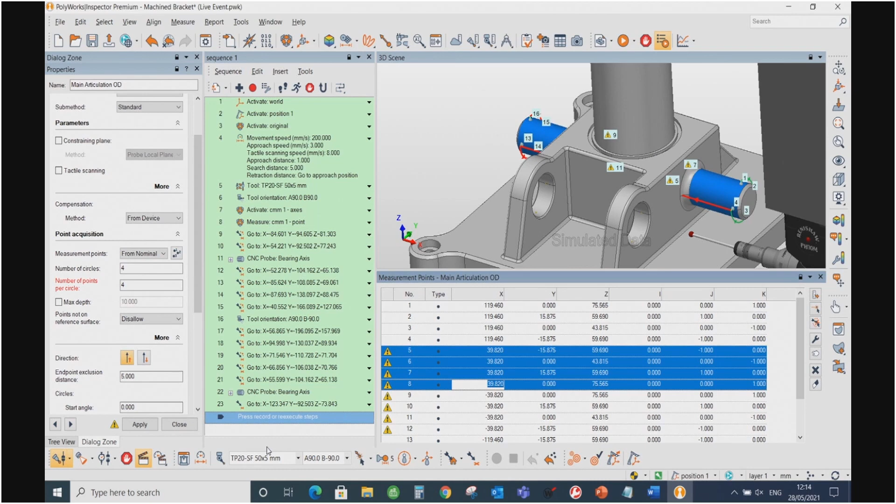Okay, so I've selected 5, 6, 7 and 8, and I'm just going to modify these and move these in the x-axis. So my x, I know that I want these actually at 80 mil, and our preview changes straight away. And because this part is symmetrical about the center, I'm going to change these points to minus 80 mil. Okay, so now at least our points are in the correct position for us to measure them. So I'm going to close now out of my properties.

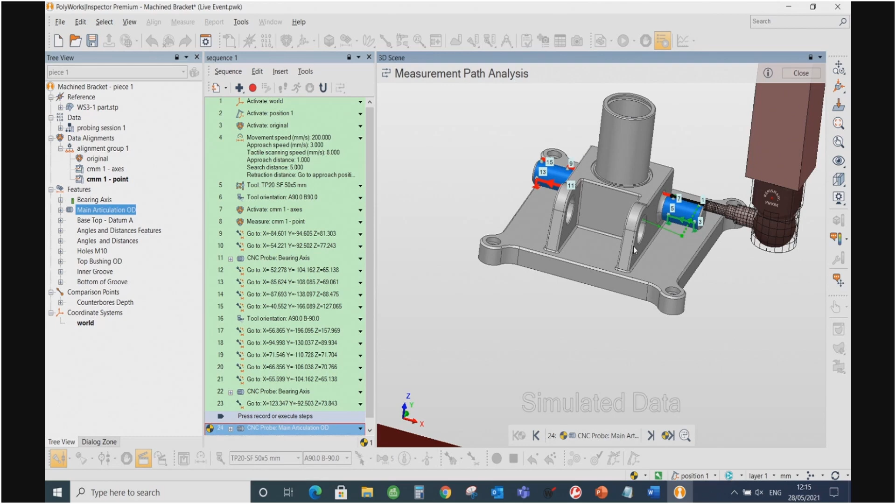What I'm going to do is add my cylinder to the end of my sequence. Okay, and we obviously get collision detected. So if we analyze that issue, we can see that after it's measured the first half of the cylinder, it's currently going to try and drive itself through the part to get to the other side. So let's split our feature up into two. Let's then add some go-to positions and a head orientation change as well.

So to split our feature into two manually, we now have a little plus icon beside our feature in the feature tree. So I know that 9, 10, 11, 12, 13, 14, 15 and 16, I want to split them into their own feature. One way of doing this is to right click and create step from measurement points, or we can simply drag these points out of the feature and just put them on their own as their own step after that.

Okay, so we still will have an issue, because our head, whenever it goes to do this second half of the cylinder, is going to be in the wrong orientation. So what I'm going to do is just insert at this stage a head orientation change.

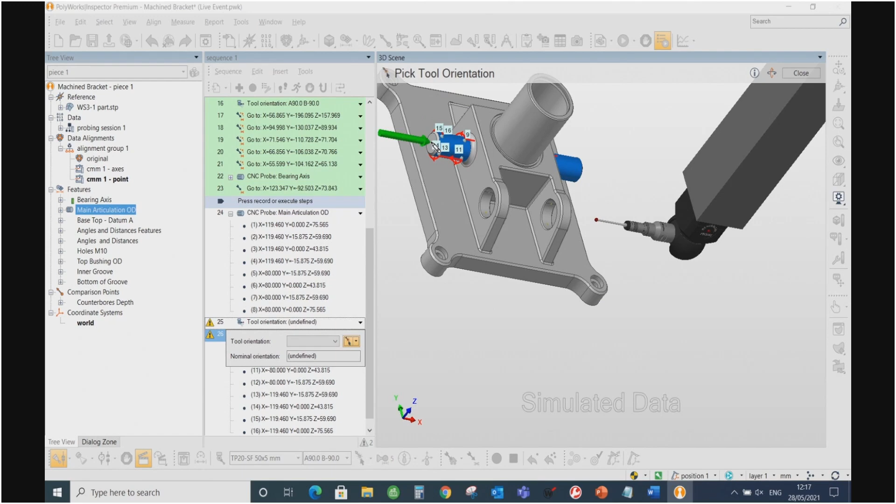Okay, and I'm going to use our picker because I'm not familiar with A and B angles, for instance, or I just want to make sure. So I can use the picker, and I can choose on screen or on the CAD model which A and B angle I should be at to measure that feature. So it's just a matter of highlighting over the surface and it'll give me the head angle and orientation to be at. Okay, so we still have an issue.

Okay, so the problem is that before it does its orientation, it's still just too close to the cylinder. So I'm going to insert a go-to position, and like the picker, I'm just going to choose it from the CAD model. Okay, so using my rotate button on my mouse, I can choose the distance from the CAD model that I want it to be at.

So now that issue is gone, so it can now do its tool orientation change, and then after that it's going to try and come over here. But again, as we can see here, the CMM is going to try and drive through the part. We can fix this very, very easily by hovering over the collision detection warning and hitting insert go-to position steps. Okay, PolyWorks then will automatically bring itself around the problem area and figure out how to get back down to then measure the feature.

So if we have a look at that, we can again execute those selected steps, and we can see it measuring one side first, go to its go-to position, and then it can measure the other side.

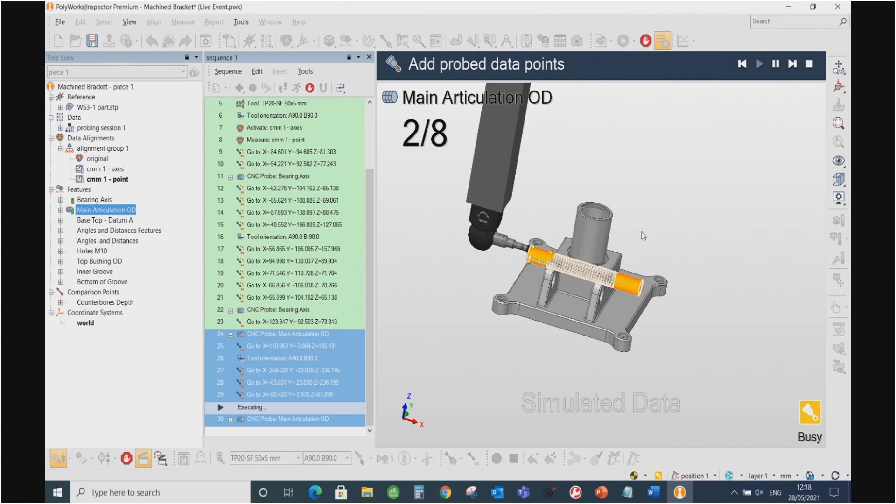Now, one problem with this is the CMM was already over here to start with. Okay, so we might want to now modify our sequence. So since our CMM started in this feature over here, we might want to get it to then measure this half of the cylinder and then come over here and then measure these two halves.

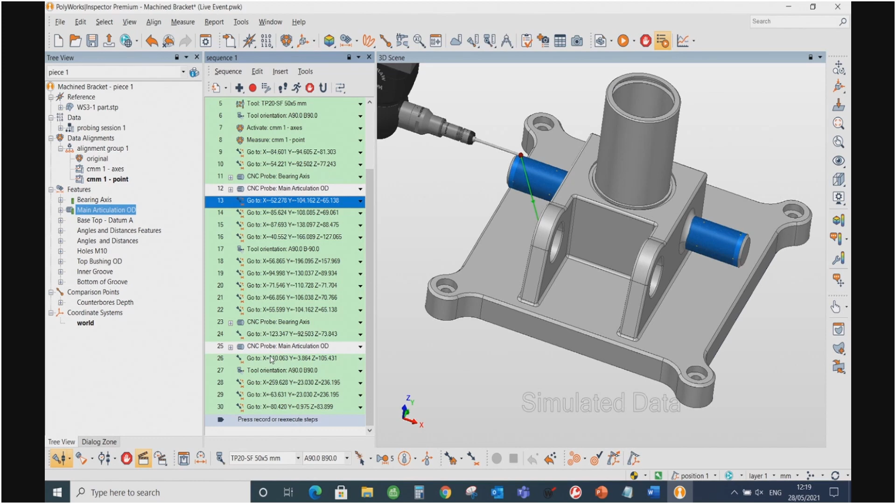So what I'm simply going to do is I'm going to drag this half of the cylinder up. Okay, so it's now beside the one where it's already. Okay, what we can do is then at the end of our sequence, we don't need this extra head orientation and movement step at all, so I can simply delete these steps. So I can just drag them out of the sequence and they get deleted.

Okay, so we can see still though we have some extra steps that may need to be cleaned up. So after it's measured this step, it then comes all the way over to here, which it doesn't need to anymore. So what we can always run is we can use our optimize go-to positions. Okay, so even if you have steps, you can ask PolyWorks then to optimize your steps.

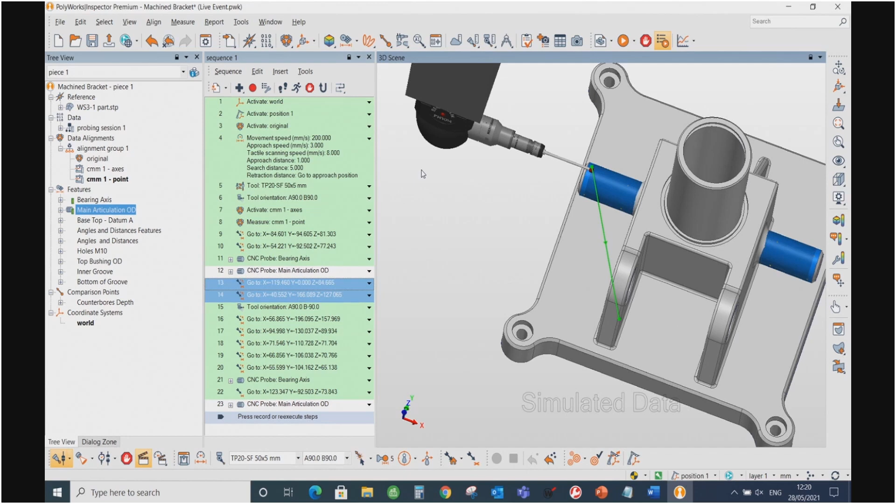Okay, so now we have a nice straight sequence getting to measure the two cylinders, but separated out into 4 steps, and 2 of them on the left hand side first, and then the 2 on the right hand side. So let's move on and let's have a look at measuring our next features that have been called out. So we have datum plane A, which again it's going to have to split up for us, and then we have some other features that have to be measured also.

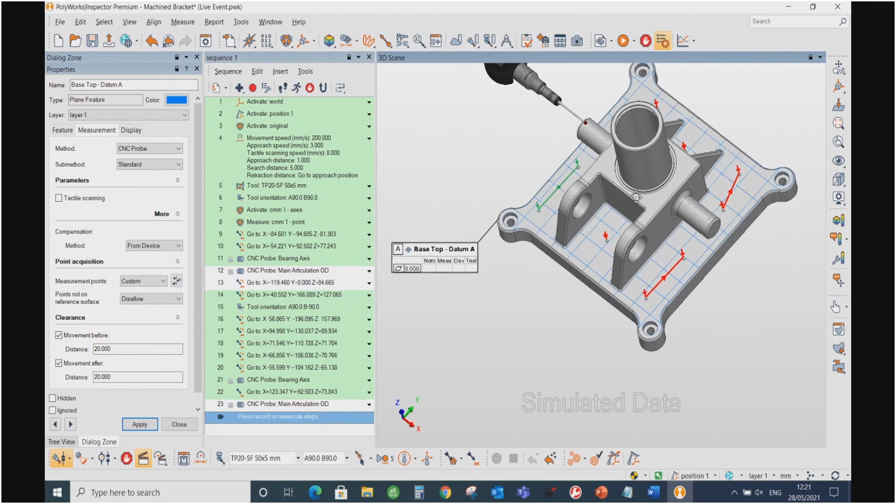So what we can do is go through and have a look at the parameters. I've already filled in the areas that need to be measured for our planes, so we will add that to the end of our sequence. So like what we did at the start with our first cylinder, I'm just going to select datum plane A. Its properties are already filled in so that it already knows to measure it in those locations and its CNC probe measuring. And I'm going to tell it to lock it to A0B0. So I want to make sure that CMM measures this plane on the straight down position.

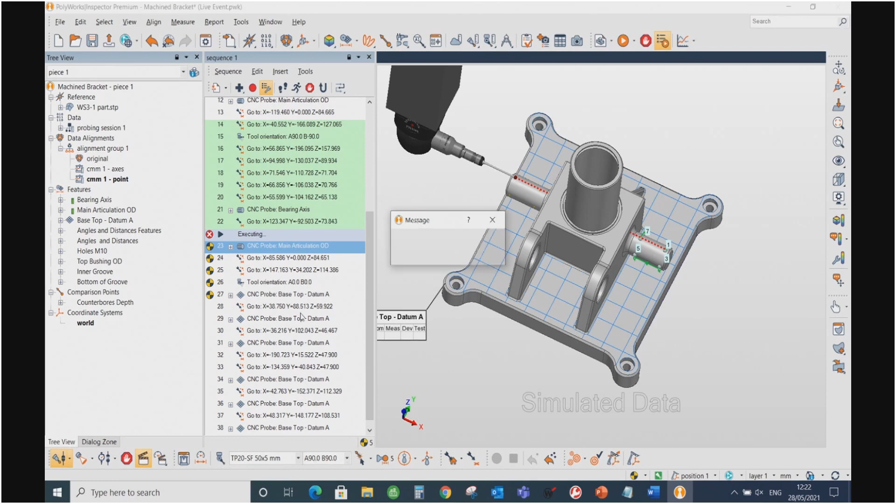Okay, so I'm just going to simply now add the selected object, being datum A, to the end of our sequence. PolyWorks is now going to calculate the head orientation change, movement, and then work out a path to get around and measure the feature. Again, highlighted up, we have a go-to position that is highlighted now. Currently, it's given us an error because our CMM is over here, but at the end of our sequence, it actually finishes over there. So if we put our sequence into position, this is where it would actually have finished. Okay, and that's only because we've changed manually earlier the order that we were working in.

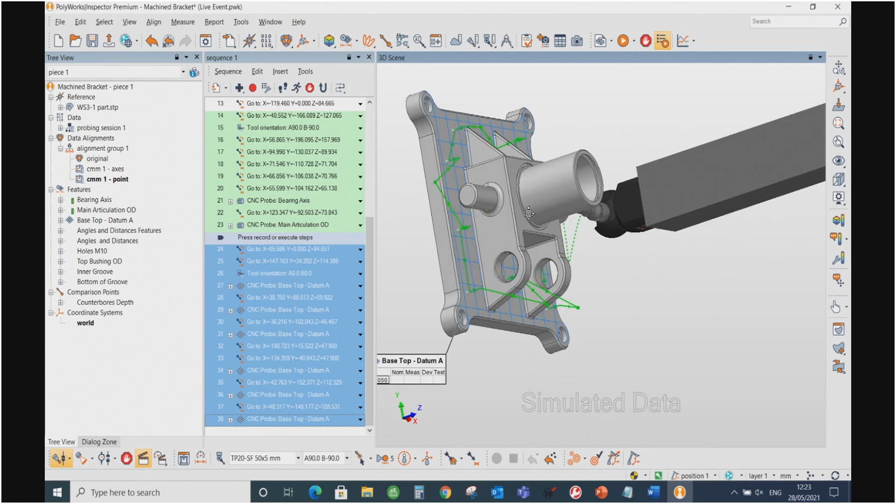So now we can see our collision detection and avoidance has gone away, and we can see that it's done a head orientation change, this dotted green line, and it's working its way counterclockwise around the part to be able to avoid these high areas and these cylinders that would normally get in the way. And it's split up the datum plane into 6 different steps. So we're happy with that, but we have other features that we also want to measure.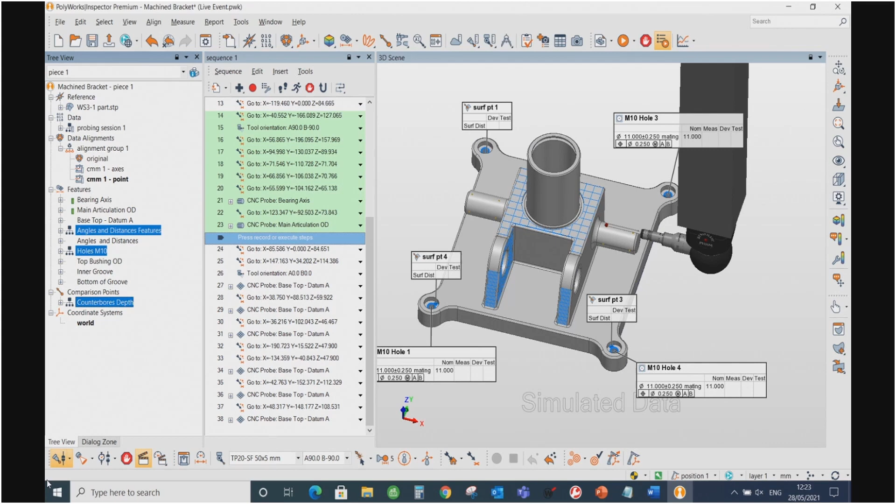And we might want to measure these features, such as these angular faces, such as these M10 holes, and such as these surface points that I'm actually using to measure first, to then create my offset distance to know how far down into the M10 hole to go. So we are going to select those features, okay, and go back into our edit sequence and measurement path. And in this case, I'm going to keep it on A0B0, but I'm going to ask PolyWorks to add the selected objects to the optimal location in the sequence.

So it already has its sequence to work its way around the part in A0B0. And now it's just going to fill these features in to the best location. So we can see that even though there's plane 1 in there, or datum A, in multiple steps, it can again add separate features in between the measurement of features.

Okay, so that's added all those features in, and if we just get a quick preview, we can see that it's a nice clean path. It's never coming to the same area twice. While it's measuring a plane's point here, it's then going to measure the M10 hole and the surface point and continuing on along its journey. So you get a much cleaner path without having to really think too much into it.

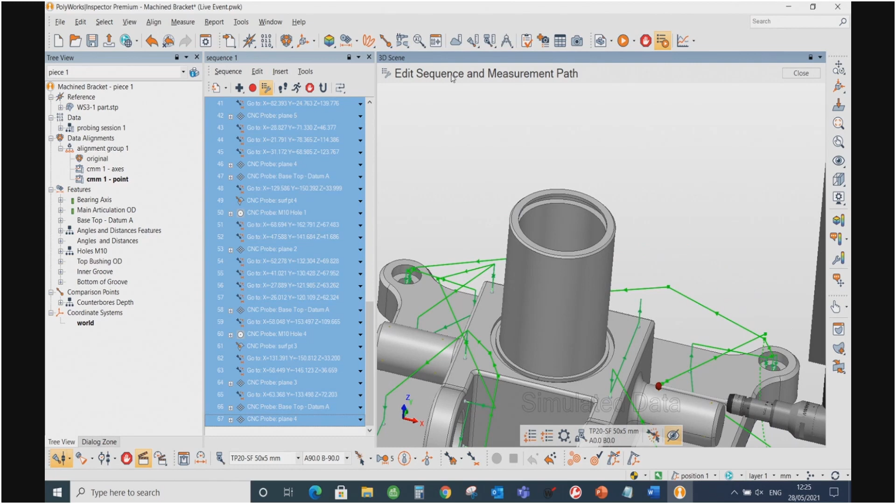You just tell it what features need to be measured. This is very useful, not just for the CMM, but for the likes of a laser tracker or an arm, where you might have a big part and want to measure certain features on the left hand side of your part first, and it might be the same feature on the right hand side. So if it's a long plane with a lot of holes in it, you can measure the points for your plane as you measure your circles or cylinders. Again, for star probes on CMMs as well, it can be quite useful, because if it's in one area, it can measure a plane and a circle's points at the same time when it's in that location.

So I'm going to jump back out of PolyWorks again now and close it down, and then we'll keep going through the rest of our new features.

So we move on to our measurement system analysis. For 2021, PolyWorks has looked at making the most out of its integration into Excel. One of the benefits of this is creating templates for measurement system analysis.

SPC tools contain methods to determine the stability of processes, to control the processes to ensure customer satisfaction, and to establish indices to quantify the capability of the process to meet the customer requirements. Those tools help identify special variation in the manufacturing process, to correct it as soon as possible. To detect these variations, it is essential to keep the measurement system variation as low as possible, in comparison to process variation. Otherwise, SPC charts could lead to wrong conclusions. The measurement system analysis, or MSA, helps identify performance of the measurement system.

There are two main types that we will be focusing on here: repeatability studies and gauge R&R studies. Repeatability studies assess the variation of a measurement system when affected by a minimum number of sources of variation. In a gauge study, an operator takes one piece, places it in a fixture, measures the piece, takes it out of the fixture, and repeats this cycle multiple times, always using the same piece. The gauge R&R is an approach which will provide an estimate of both repeatability and reproducibility for a measurement system. This method decomposes the system variation so we could analyze the equipment variation, but also the variation due to the operators and the manufacturing processes.

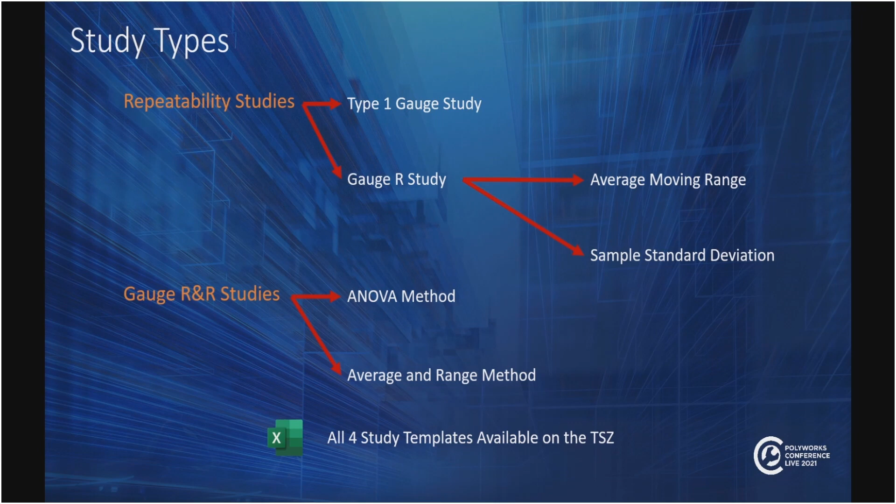When designing the study type, there are 4 built into PolyWorks and available on the technical support zone. For repeatability studies, we have the type 1 gauge study and gauge R study, which can then be analyzed using average moving range and sample standard deviation. For gauge R&R studies, we have the ANOVA method and the average and range method. I'm going to go through this process for a gauge R study.

All of the analysis will be taken care of without having to do any calculations or data inputting. The benefits of this will be clear. So what we will do is go through this in PolyWorks. I'm going to open up this.

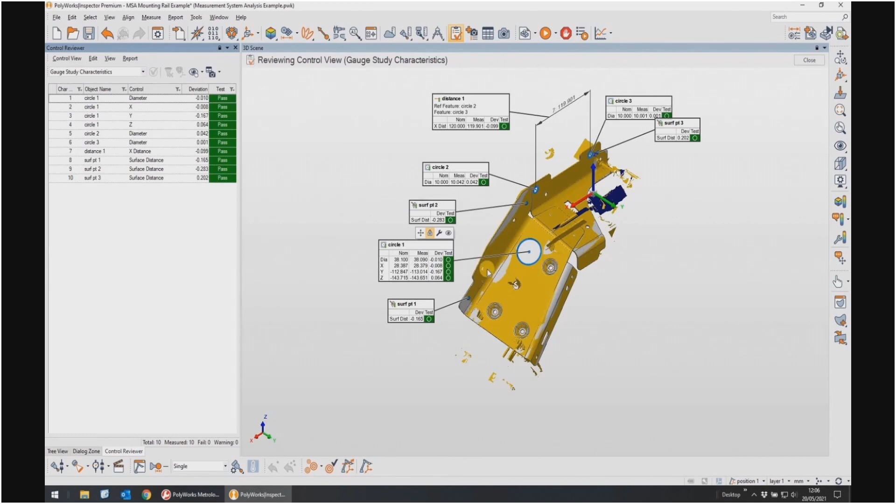And we have our part now that we are interested in. We only have one piece, so we've measured our first piece and imported the CAD and the features that we're interested in. We've now turned on our new toolbar, which can be turned on or off depending on if it's needed, and we're going to select our key characteristics. In this case, I'm just going to select all of them that we're going to be using. That now will give us them in Control Reviewer.

We just want to set up a nice image for our Control Reviewer, so when it is time to review it, it is set up nicely. So we're going to now choose what type of study we want to do. We have the repeatability or the gauge R&R, and we then have a type 1 or a gauge R study. So we fill in our part name, part number, gauge name, and operator name. These are all going to be kept with the part all the way through into Excel at the end.

So it really is just guiding us through how we want to do our study. We're going to do it with 10 parts, and measure the average moving range. It's going to create a template so we don't have to, and then it's going to create our 10 blank pieces, getting ready for us to measure them. We're then guided through to measure them all in the next step.

So that's all ready to go, and we have our 10 pieces. So it's a matter of inspecting the next piece now. We've obviously done number 1.

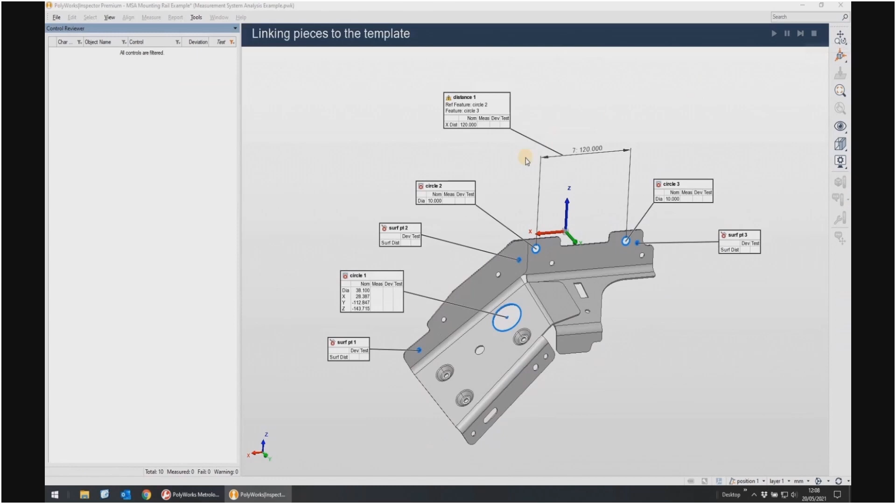Now what I'm doing here is just importing the scan, but as always with PolyWorks, you'd be guided through to measure the part the same way as you'd measured it the first time. So whether it was scanning, probing, or on a CMM, you'd just be taken through the sequence however you have it set up.

Okay, so we've sped this up a little bit because it's all fairly repetitive here, going through the measurement of each of the 10 pieces. We can see even just on screen now how surface point 2, if we focus on that, is deviating over the pieces, falling within and out of tolerance.

So here's our last piece being measured. That's all our measurement done, so there's our 10 pieces. Again, the operator is told you've finished all of them. So now it's time to publish our study.

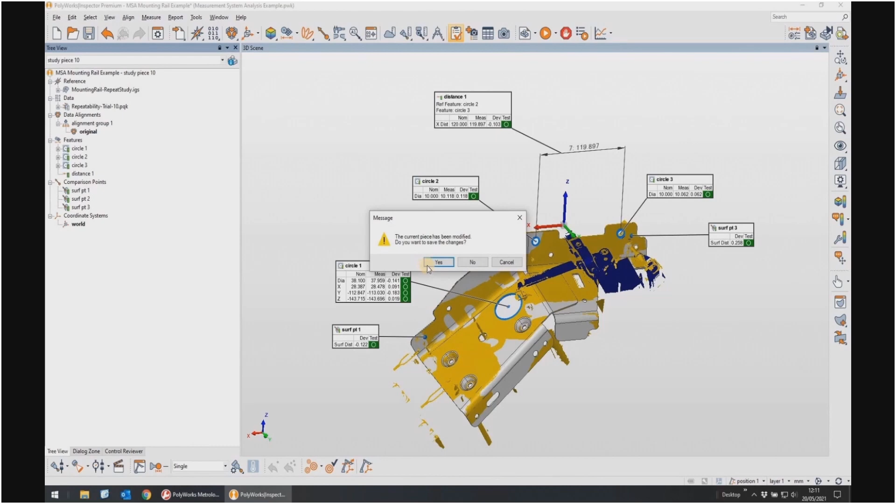Now we will be asked to select our template to use for publishing our study. These are available on the technical support zone, and it's just a matter of browsing the software to it. Depending on which study you're using, you choose that study from your file explorer, and it will open it up and populate it in Excel.

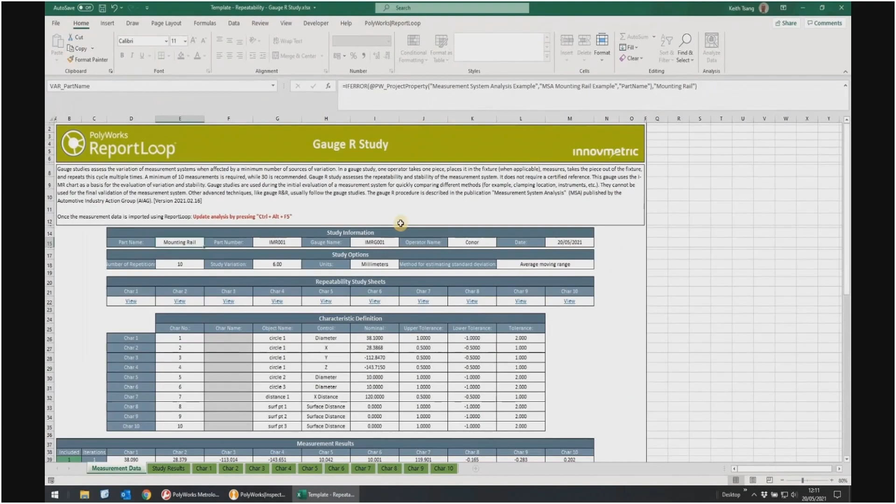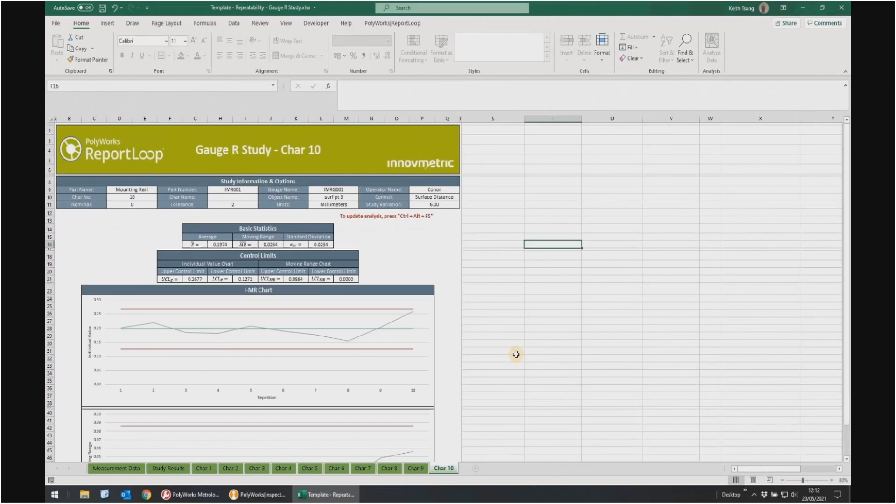So now we can see our gauge R study has been compiled with all our characteristics and all of the values. We have our study results, and a separate sheet for each characteristic we've chosen. So all the time is taken out of having to measure your parts, make sure you've measured them the same way, export your information, and fill it into Excel. This takes care of everything and gives it a very nice format so you can make sure you're happy with the process or not, and you have 4 different types of processes to monitor now as well. Okay, so there's our last characteristic.

And we're back then to our presentation.

So, in conclusion, for the MSA toolbar, the benefits really are that customers can now move from a paid specialized software like Minitab to an accessible one like Excel. For streamlined processes, there is no need to send data to an external software for calculation and then bring it back. The user can do everything in the same place in the PolyWorks digital ecosystem. The value inputs automatically instead of manual value entry. And for repeatability especially, it preserves a live native link between the report and the inspected pieces, so changes are tracked and adjusted. Finally, since everything is located and calculated in one solution, it is simpler to ensure traceability of the analysis process.

We have had a lot of customers wanting to use PolyWorks for CMM program creation, as they are finding our user interface is better, more intuitive, and the collision detection to be extremely useful. A big reason to export from PolyWorks is to have the ability to supply customers or suppliers with the same program that you use, but the ability to run it in their own software.

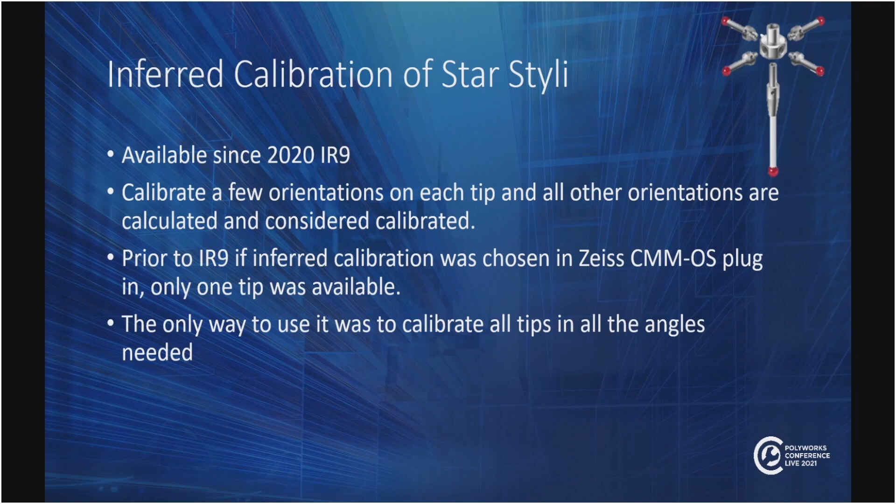Now we move on to Styli calibration. A very useful and time-saving tool has arrived for Styli users: the ability to calibrate all head orientations by using the Inferred method. This was released in the IR9 version in 2020. This means that by calibrating a few orientations on a Styli tip, all the orientations become available to use. This becomes a massive time saver, as it means time spent on calibration is dramatically reduced and your CMM becomes more adaptable to changes in parameters.

In PolyWorks, you now get the ability to change the tip to use when creating or changing the tool orientation. The picker will now display the tool tip in its full name, and the probing device toolbar allows you to change the tip you want to use directly. The calibration style will also soon be released for CMM users running their CMM through Renishaw's UCC server.

Offline mode is now available for Hexagon scanners via their I++ server. PolyWorks has been able to connect and run Hexagon scanners on CMM since 2019, but it was through the I++ server, and still is. Offline simulation was not available while using this. Now, however, the scanner is built into the software so the offline simulation can be calculated. To do this offline, connect through the CNC CMM plugin. Once you are happy with the program, connect to and run the machine using the I++ CMM plugin. The scanners it is available for are the HPL 10.6T, the HPL 5.8T, and the HPL 20.8T.

The C angle is also available for offline simulation, so you can allow PolyWorks to completely optimize your toolpath. And the adapters to change the angle of the head by 0, 30, 60, and 90 are now also available.

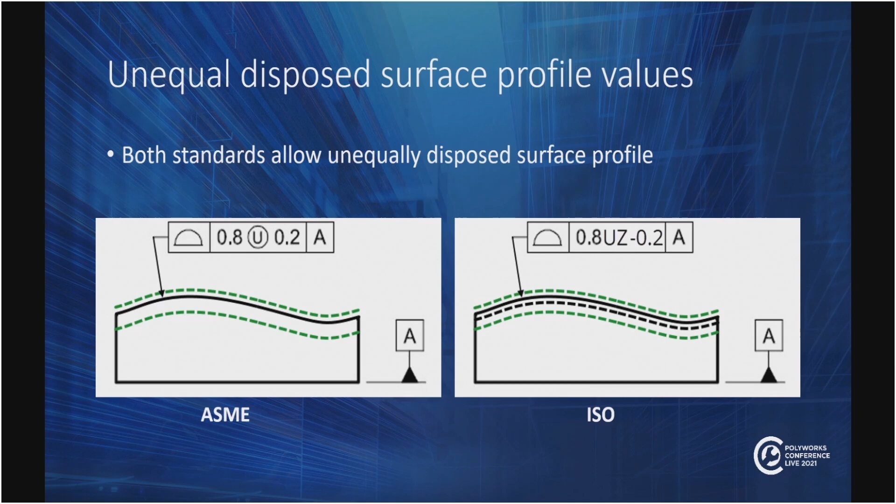With ISO, the first number is the same — it shows the size of the tolerance zone — and the second number shows the offset of the center line of the tolerance zone to the nominal surface. The reported value now comes from the center line of the tolerance zone rather than the CAD surface, which is also in line with both standards.

Here is a quick run through just to show you the process — very minimal change for the user. They can import the CAD, and they just get a new option now to connect straight into their PLM. This really does save the time of designers having to save or export IGES or STEP files out from their PLM.

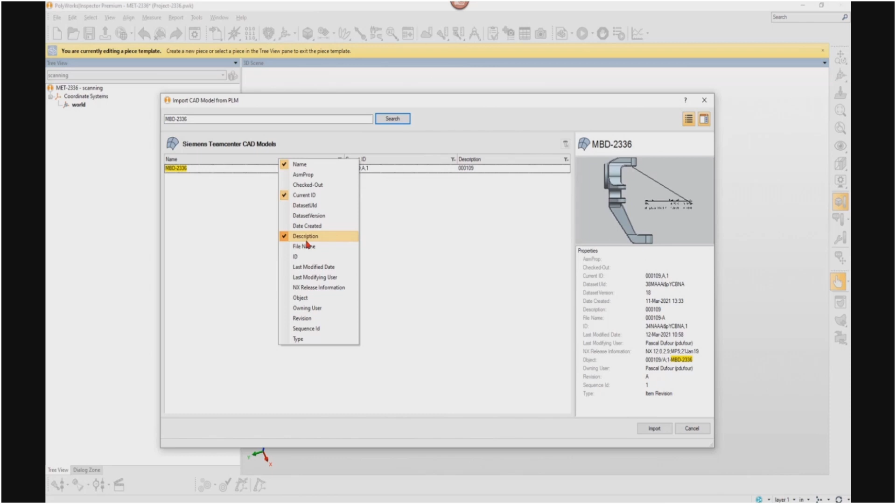And it saves your storage. So everything is still saved in the one location that you're currently using and doesn't need to be exported out. It also is more secure. So you can, I suppose, filter out or see what you're using depending on what you want to see.

Now, all of this information, like your current ID, the description, the person who's modeled it, can all come straight into PolyWorks. So you get direct access into the information, and we can see that in the piece properties here. So we can see the ID, the owning user, the revision that it was currently on. So information that's filled in your CAD package is now coming direct into PolyWorks.

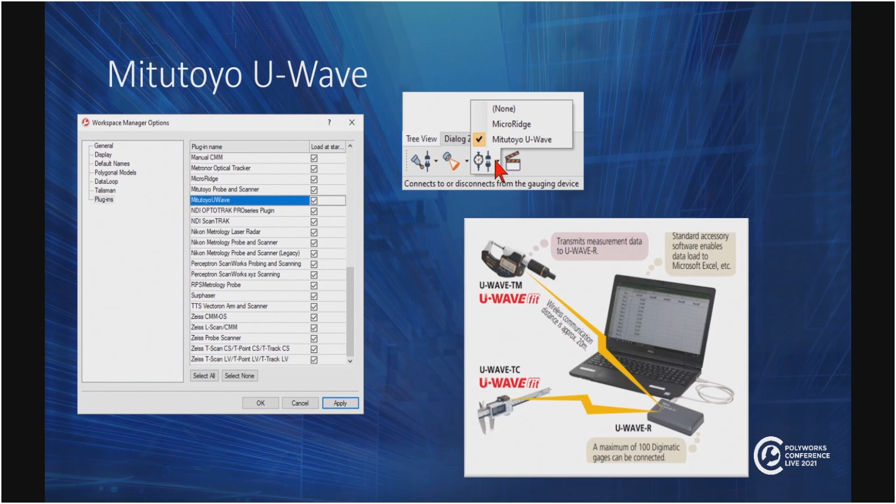So let's move on now to the Mitutoyo U-Wave systems. PolyWorks now has a plugin for connecting to Mitutoyo hand tools via its U-Wave. Simply turn on the plugin for the Mitutoyo U-Wave at the Workspace Manager, change your gauging device to Mitutoyo U-Wave in Inspector, and connect. Measurements taken on the device are now sent to the computer and PolyWorks wirelessly. The computer will need a receiver connected to it, which can connect to multiple devices simultaneously. This is extremely useful when multiple gauges are required per part.

Benefits on using gauging devices with PolyWorks include speed of use, as it takes away manual processes like entering nominals, measurements, and tolerances. It also negates the error of an operator filling in an incorrect value. PolyWorks can convert incoming units if required. It will guide the user to where the measurements need to take place. And PolyWorks can store device information which can be referred back to calibration certs to save time on audits.

A new feature this year is hooks. These will be part of our PolyWorks macro scripting. So let's look at macro scripting currently. It is a very powerful tool as it can automate repetitive tasks, automate processes, perform checks, and even generate external files. However, they usually require a manual user intervention to be executed or need to be part of a sequence.

What hooks can do are monitor what the software is doing and can trigger a macro to be run before or after an action. Some examples of these that have been requested are to load or give the option to load a visual layout after opening a new file, create a new piece or launch play inspection after a project has been opened, set property values before saving or closing, block upload to DataLoop or continuation at all if all conditions or properties are not yet met or filled in.